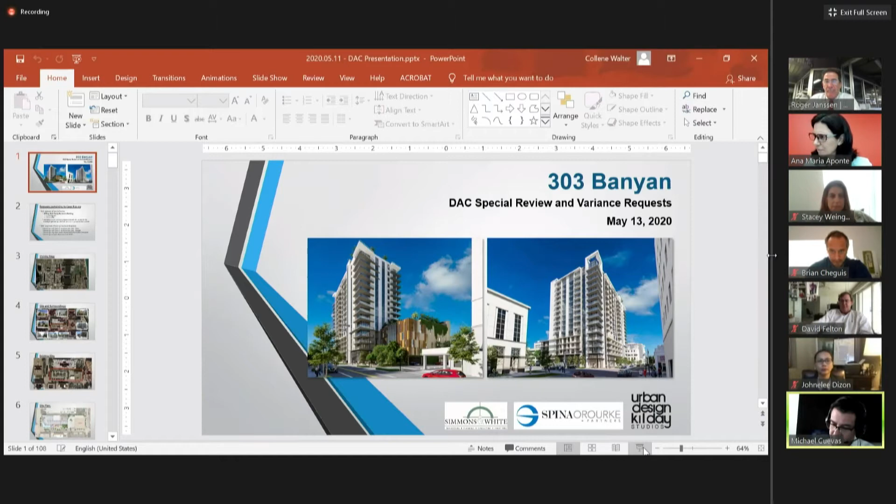Rob, you are on. Good morning, everybody. Let me just get my screen shared here. All right, just as a technical clarification, does everybody hear me all right? Yes. And is everybody seeing the PowerPoint presentation on the screen? Yes. Great, good morning.

My name is Rob Dinsmore with Urban Design Kilday Studios. We are the agent for the 303 Banyan development project. I'm joined today by the applicant, Todd Jacobus with Woodfield Development Company, as well as other members of our design team, Keith Spina and Tammy O'Rourke with the Spina O'Rourke Group, the architects. Collene Walter, also with Urban Design Kilday Studios, is here with me in the office. We have Greg Bolin, Brian Kelly, and Eric Cooper with Simmons and White, who are the civil and traffic engineers on this project, and Brian Donahue with Insight Studios, who are the landscape architects on the project.

We are before you this morning in regards to case 20-03 on your agenda. It's a multi-part request, and we are seeking DAC approval of special review for a 15-story multifamily residential building, consisting of 233 dwelling units and 3,185 square feet of first floor retail. Also, as part of that special review request, we are seeking approval for the utilization of TDRs previously approved for this site to increase our building height and FAR under the Quadrille Garden District Special Incentive District. We also have a request for approval of 4 variances, which we will go over in more detail during the presentation.

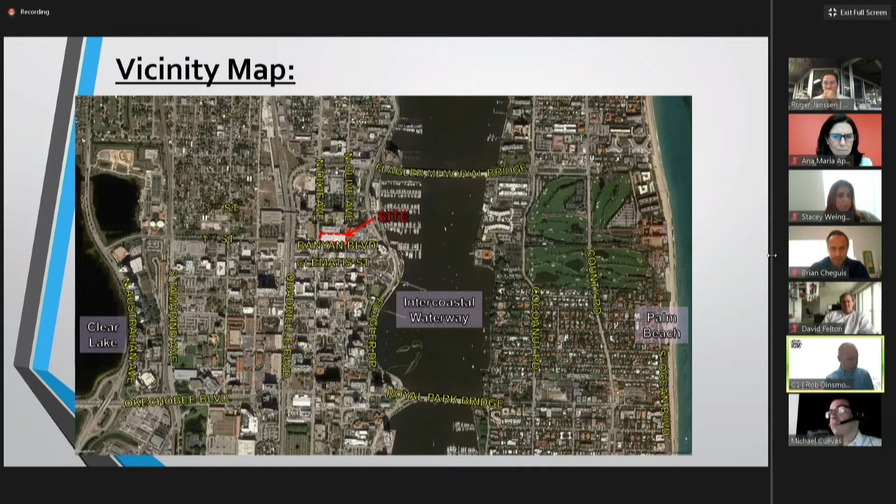Project site is located on the north side of Banyan Boulevard between Dixie Highway and Olive Avenue. Banyan Boulevard itself is one of the city's main transportation corridors, east and west within the city, connecting downtown and

the Flagler waterfront. The surrounding uses to our site on the west and north side are mostly governmental: City West Palm Beach City Hall, Palm Beach County Courthouse, and the Palm Beach County Government Center. On the south side, we are surrounded by retail and commercial uses.

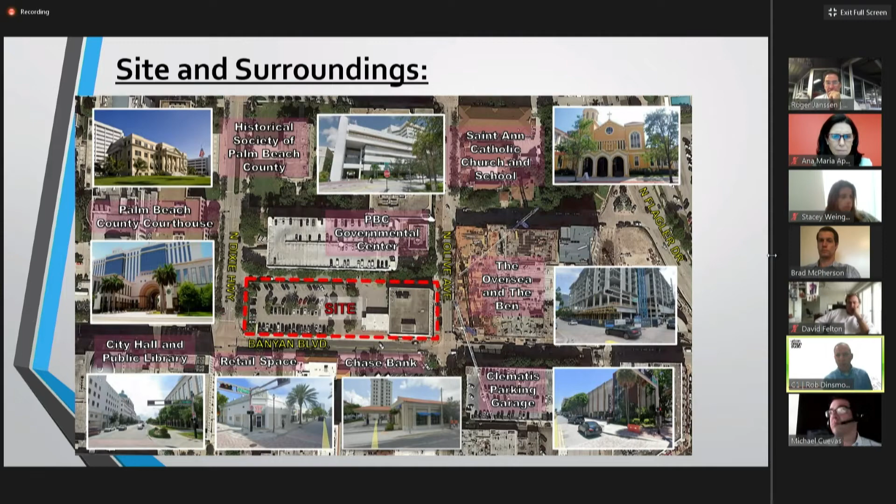And directly to the east, as part of this connection to the Flagler waterfront, is the former City Hall site, the redevelopment of the Ben, and the Oversea multifamily building, which happens to also be a Woodfield development project, who is the applicant for this particular project as well.

The site itself is 1.66 acres along Banyan Boulevard. It currently supports a 4-story, approximately 44,000 square foot office building with 5 drive-through lanes for a financial tenant, Wells Fargo, and a surface parking lot.

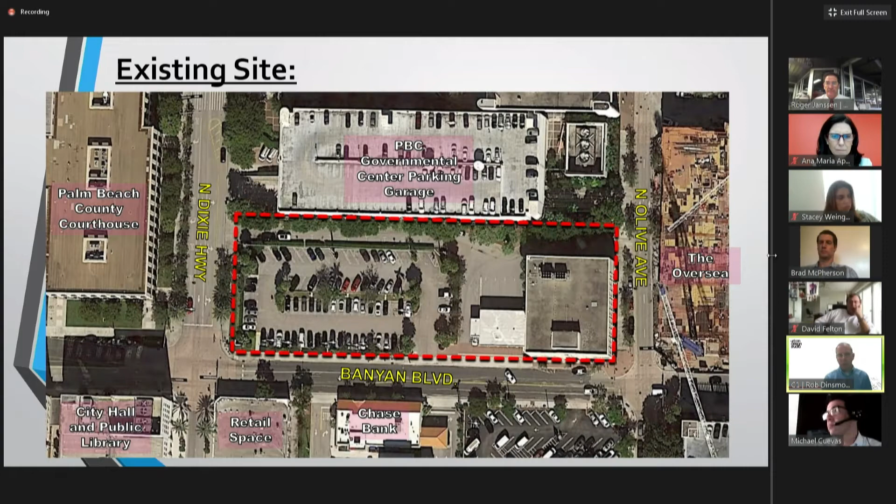The proposed plan of development includes maintaining that existing 4-story office building, as well as 3 of the 5 drive-through lanes. We have the 15-story multifamily building on the western portion of the site with an internal parking structure and almost 3,200 square feet of first floor retail designated within the light blue.

It also includes some surface parking and a 2,332 square foot garden courtyard at the southeast corner of the multifamily building itself, central to our Banyan block.

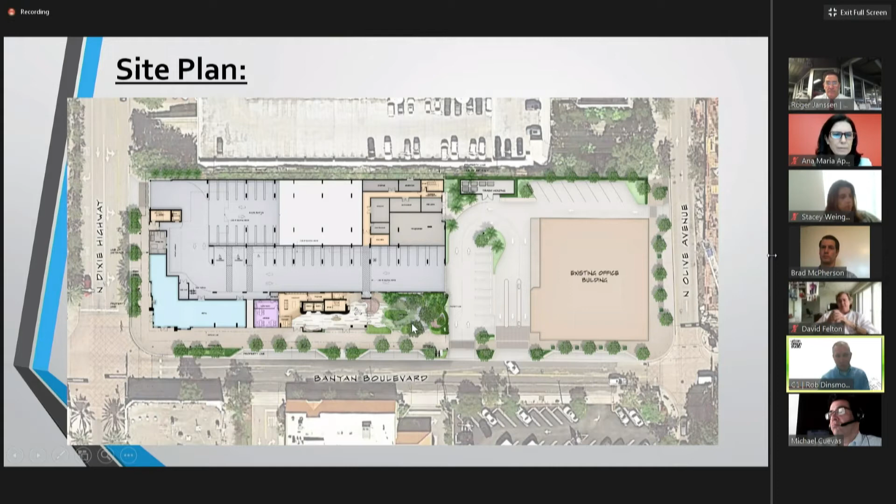So any project site within the downtown master plan with a site area greater than 50,000 square feet, or requesting the utilization of TDRs, requires DAC special review.

Just to refresh everybody's memory for anybody in attendance or listening, the DAC special review standards include the relationship of the building to the site and surroundings, circulation and traffic flow review, analysis of the building design itself, and review of public realm improvements.

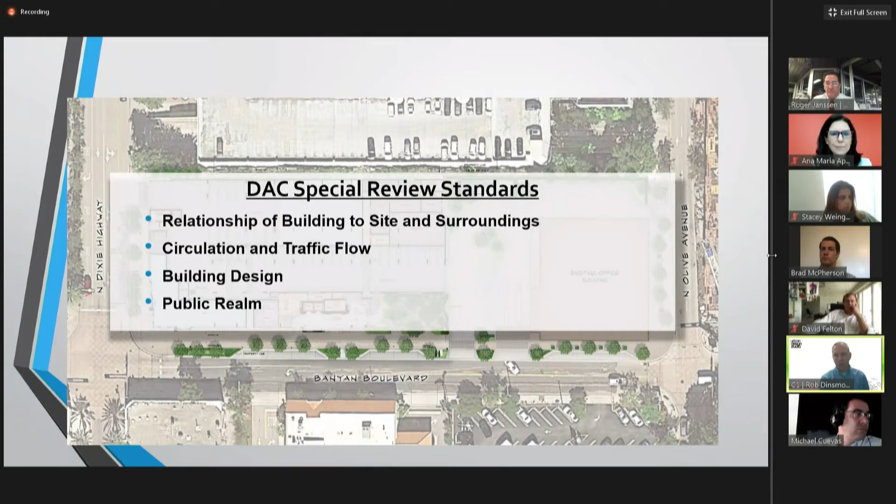We might not hit on all of these items in this exact order, but it is our goal to touch on all of these to make sure this committee can make an informed approval of this project.

So we'll start by looking at the existing circulation of the site. Our site currently has 4 curb cuts or driveway entrances for ingress egress, 2 of which are along Banyan Boulevard, which almost create a continuous 80-foot curb cut.

Approximately 50 feet of which are to provide the functional use of the 5 drive-through lanes that exist today. The downtown master plan code allows for a maximum curb cut of 25 feet.

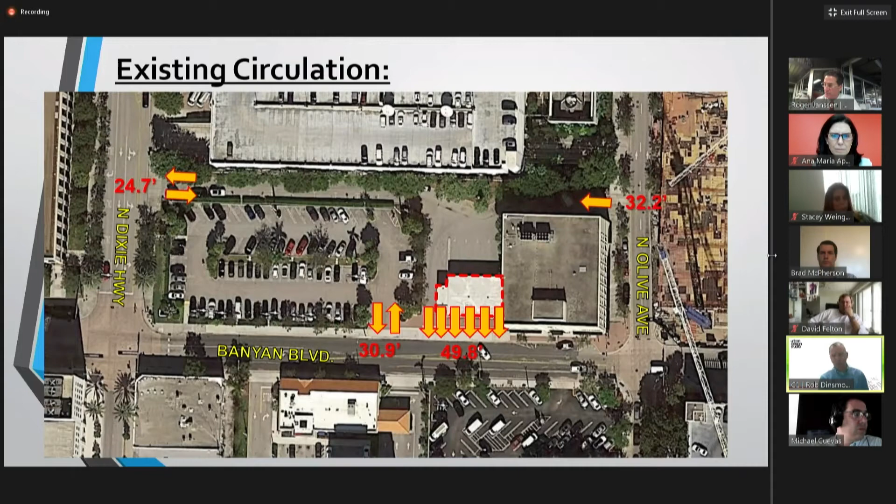The existing condition, as it stands today with all of these curb cuts, really does create a potentially hazardous situation for pedestrians. This is something that we would like to improve on.

So with the proposed plan of development, multiple improvements have been made in regards to circulation and access to the site. One of our goals as we worked through the design process, and trying to make sure the site would function well with our proposed use and the existing use, was to maintain the curb cuts in their current location as much as was appropriate, to allow for that traffic familiarity to be maintained for the site itself.

This also included a reduction in the width at every curb cut location. None of the curb cuts remain as wide as they were before. We did improve on all of those.

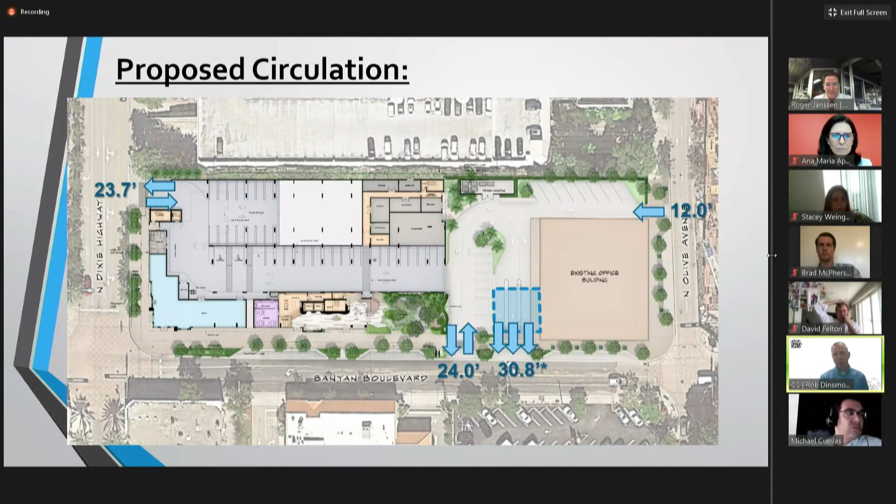The applicant has worked very closely with the current owner of the site and the existing office building, and with Wells Fargo, the main tenant within that building, to come to an agreement to reduce the drive-through lanes from 5 to 3. This allowed us to make a reduction at that particular curb cut alone of almost 20 feet, so it really did improve that situation a lot.

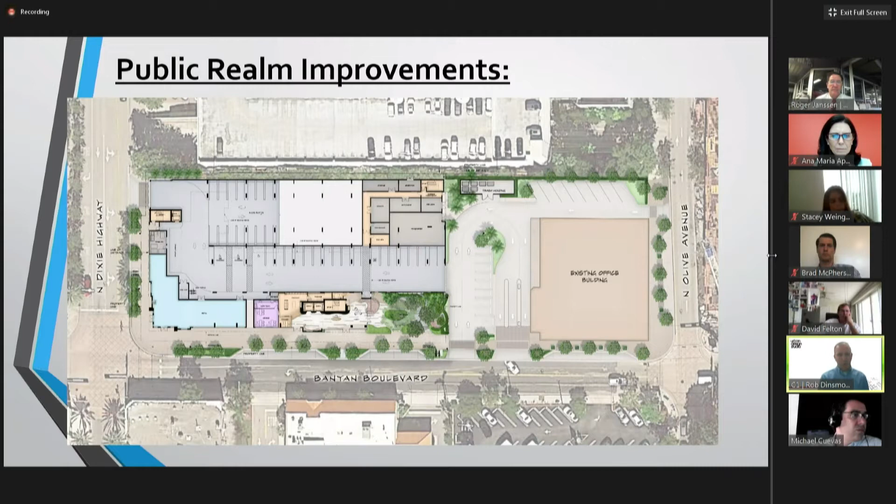In addition to the improvements for the curb cuts, which improve public safety, the proposed project also provides several public realm benefits. First being a public open space, a

2,323 square foot garden courtyard, central to our development block, with planter wall seating, public art, and convenient public access to the residential lobby as well as the parking structure.

We are also proposing multiple streetscape improvements along all of our frontages of this project site: Dixie Highway, Banyan Boulevard, and Olive. Those improvements will include new street trees and landscaping, as well as providing the required structural soil improvements under the sidewalk to support those trees.

Decorative paver crosswalks at every driveway for an added safety measure. Additional on-street parking along Banyan Boulevard, bike racks, and an enhanced bus stop, which includes ADA accessibility and shaded seating under the proposed landscaping along the streetscape.

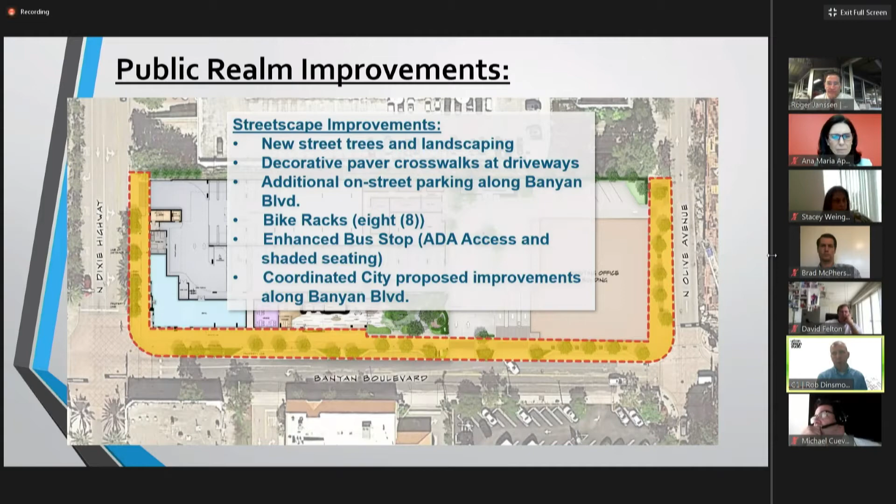And we have worked in coordination with the city to make sure that our proposed improvements along Banyan Boulevard are coordinated appropriately with the city's proposed improvements to that street.

As a TDR receiving site within the downtown master plan, we are eligible to take advantage of the special district incentives that will allow for an increase in our FAR and building height. We are asking DAC to approve that utilization of those TDRs for TDRs that DAC has previously approved to be transferred to our site. This will allow us to increase the height of our building from 10 to 15 stories and the FAR from 2.75 to 3.75, resulting in a proposed total square footage for the entire project site of 271,387 square feet, roughly 44 of which will be the existing office building remaining on site.

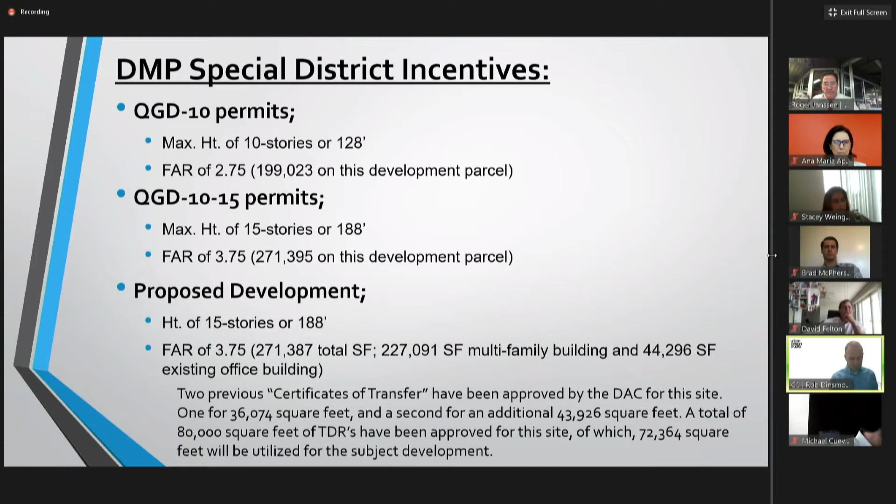We began this design process at the end of last June with a pre-application meeting with the city, and made our initial submittal at the beginning of September. From that point, literally up until yesterday, we have been working closely in coordination with the city in review of this project and the design, with the main effort being to eliminate or reduce any possible variance requests as much as possible.

This has probably been more taxing on Keith and the architecture group than anyone, because they really had to conceptually redesign the first floor of this building four or five different times, trying to work through possible solutions, finally landing on one, or coming back to different design layouts to make sure we're going to have a successful project.

What we came to realize is that there were certain constraints that were going to be very hard to overcome. We were trying to deal with the existing functionality of the site as it stands today, especially since we are maintaining that office building in its current location. Even though we are reducing the drive-through lanes from 5 to 3, it still has to function, so that is a constraint item on the design of this project.

We are dealing with the actual physical constraints of the site itself. It is a very narrow site, north to south. So when designing a building that has to function, and especially creating a parking structure that needs to function, there are minimum design dimensions that have to be accounted for.

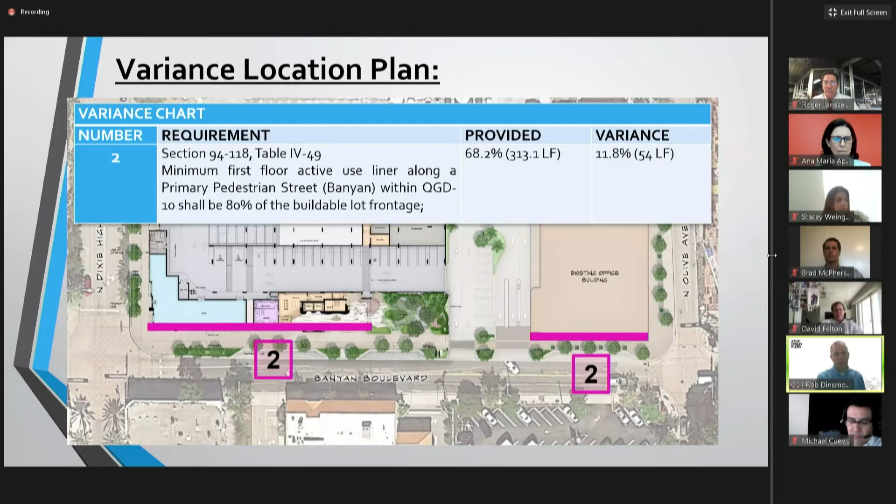The second variance is for the active use liner space along Banyan Boulevard. Again, we really have maximized this as much as possible. One of the biggest hurdles we ran into was the drive-through lanes, which require a good portion of frontage along Banyan to allow those items to function properly. So removing that linear footage, as well as our traffic circulation needs for the building, we really did lose some active use liner space there, but we maximized it with all the other items we are providing.

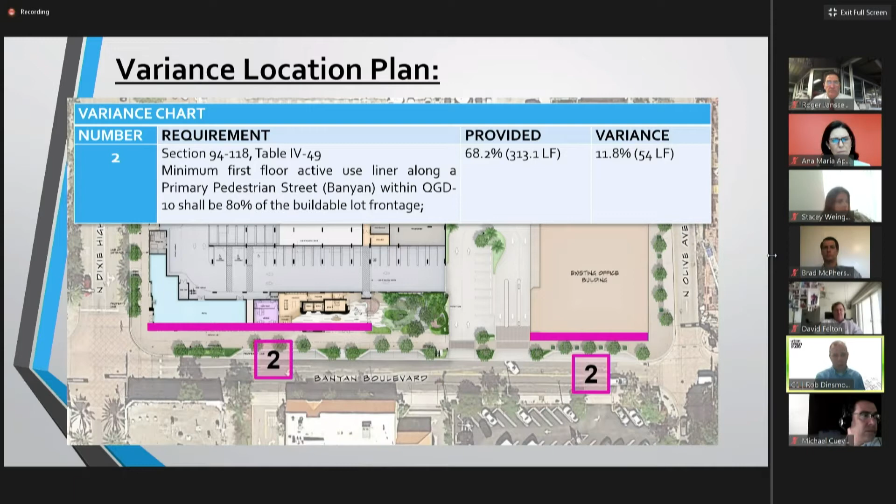The third variance is for the active use abutment to our public open space. We would have liked to add some active use liner space along the north side of this public courtyard. However, with the physical restrictions of the site itself being so narrow north to south, we had to provide minimum dimensions for the parking structure to function, and so we were limited in that regard.

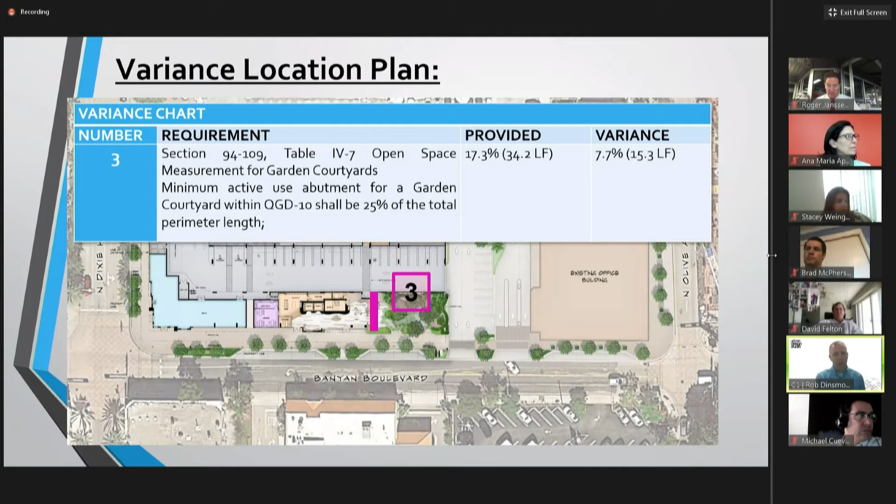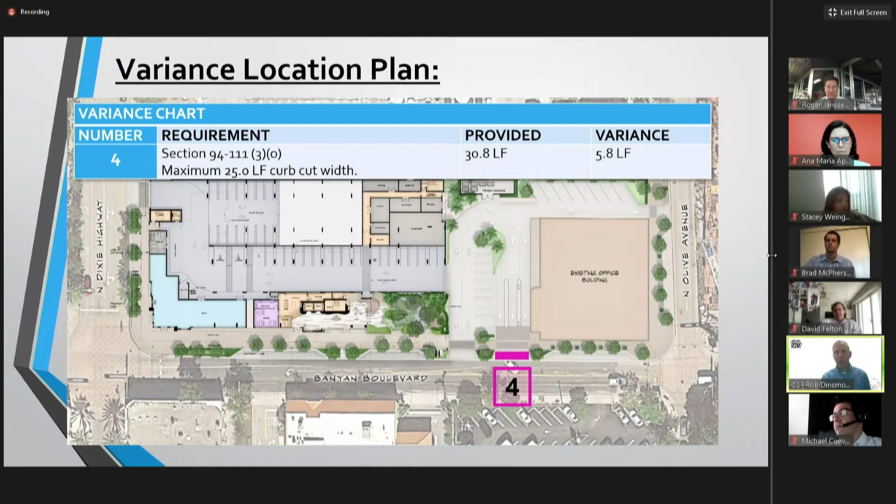The final variance comes back to the drive-through lanes and the driveway width. The downtown master plan allows for a 25-foot driveway width, and we could only reduce ours down to 30.8 feet, which is a big improvement on the current 50-foot curb cut in that area. But with the existing drive-through lanes in their location, the point of service was so far south that we could not reduce that curb cut any further to allow vehicular movements to safely function in that area. That's the reason for this variance request.

So, like I mentioned, we really did go through a pretty thorough design process in close coordination with the city and all of their departments.

And we feel that we have landed on the minimum variance requests as required for this project. And staff does support all of our variance requests.

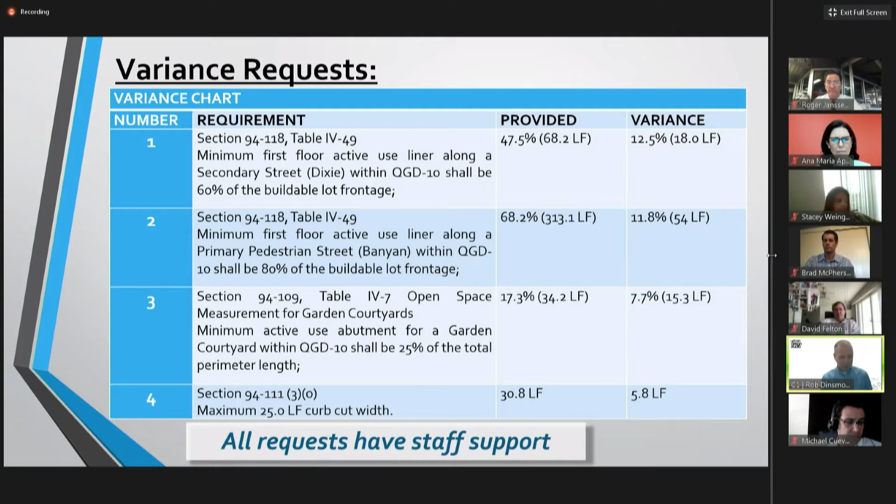And so at this time, I will pass the presentation over to Keith Spina to discuss the architecture and the building's relationship with the site and surroundings.

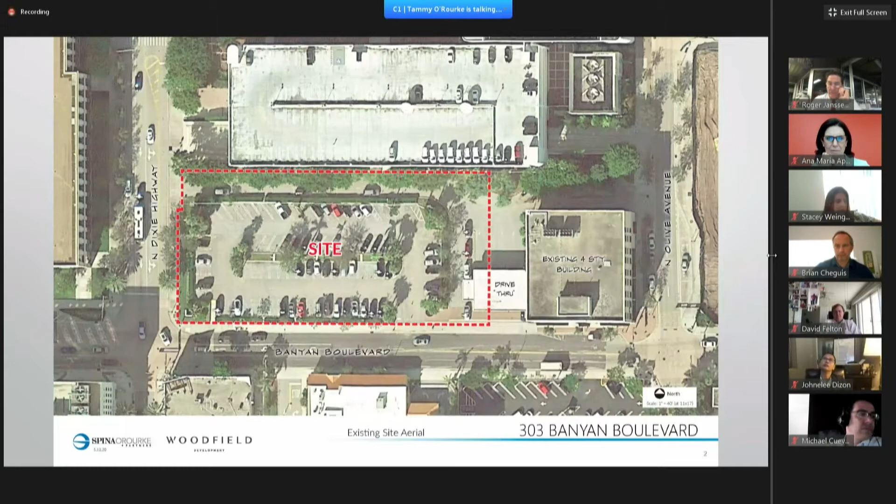Next slide, Rob. And one of the things we wanted to do as we started to design this project is really understand the surrounding properties. I think it's also part of what DAC looks at.

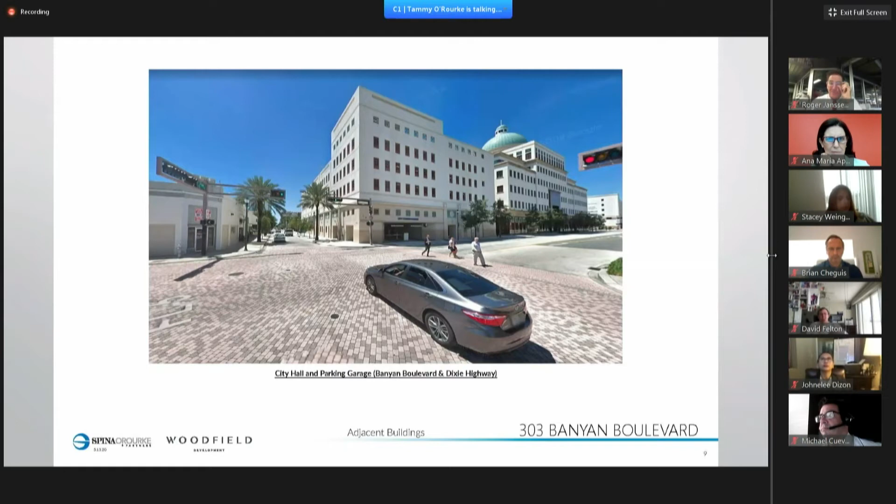So what I wanted to do now is just walk you through the building plans.

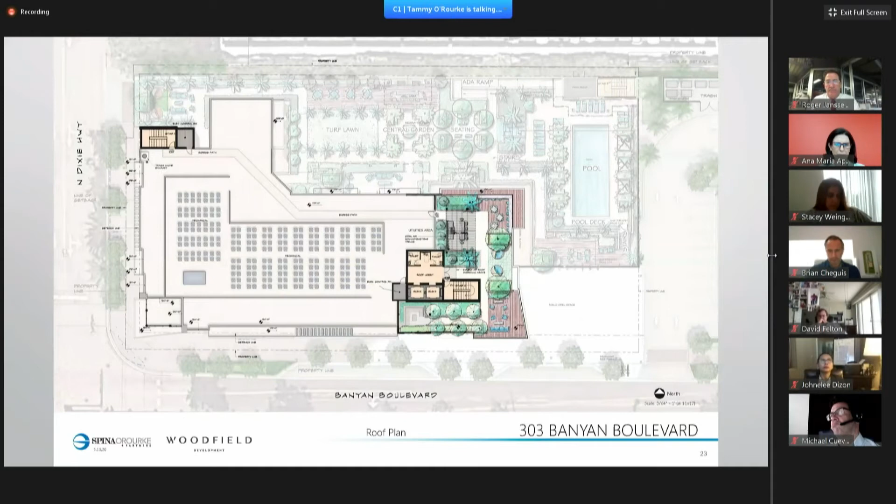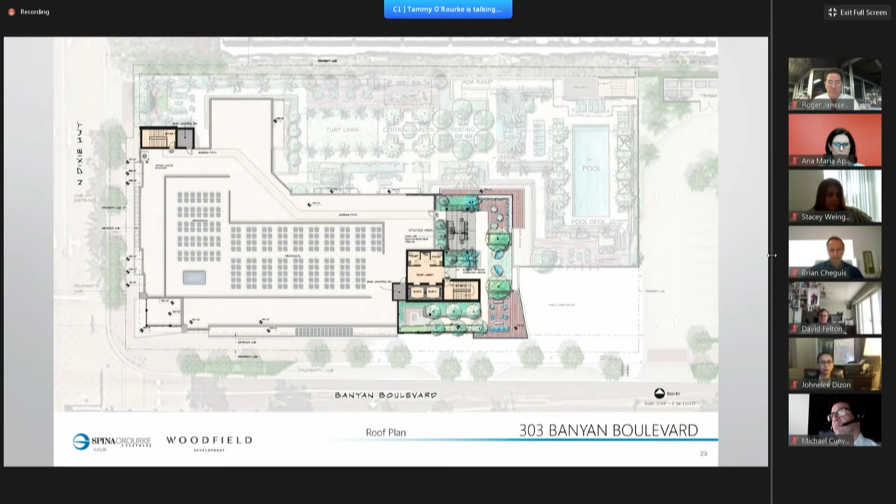At the top of the building we have an incredible rooftop terrace that is east-facing, with dramatic views of both the Intracoastal and the Atlantic Ocean. We did a rooftop terrace on the Oversea project that's just about finished, and we can't wait to use it. But after finishing the Oversea, we realized that although it had a beautiful west-facing view, we really wanted to locate this terrace on the east end to get dramatic views for the residents.

Now we'll talk a little bit more about the exterior.

Again, in keeping with trying to figure out what's existing in the market, this slide shows some existing buildings, partially existing is One West Palm on the top right, and we have the Oversea, the Ben, and the Alexander Tower, which are all existing projects. On the left is Broadstone in the middle, and then a couple of projects that, although not built yet, were previously approved. We studied the architecture and worked closely with city staff on things like how to screen liners and how to treat big walls on buildings. We thought this was really helpful. So these were some existing and proposed projects in the city.

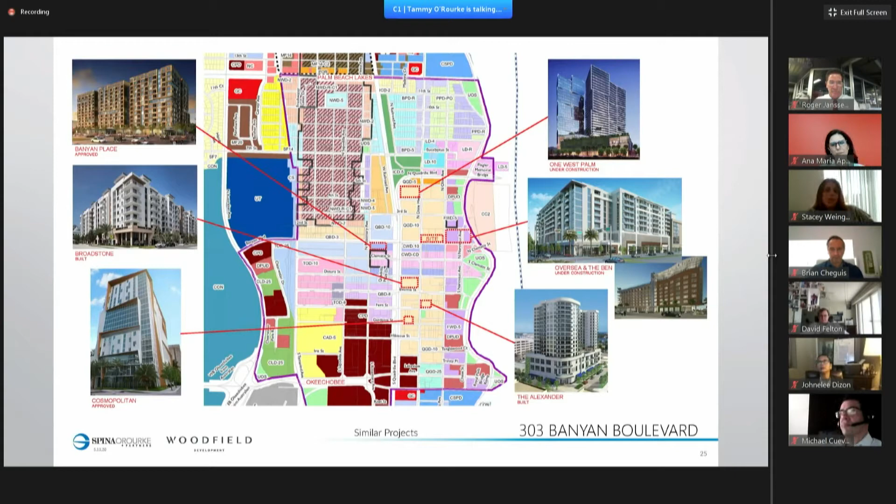Then in more detail, we started to really study existing buildings that were very similar in product type, meaning most of these are residential, multi-story, in most cases high-rise buildings. We looked at different ways, some older, such as the Strand, and some of the newest, in this case the Oversea.

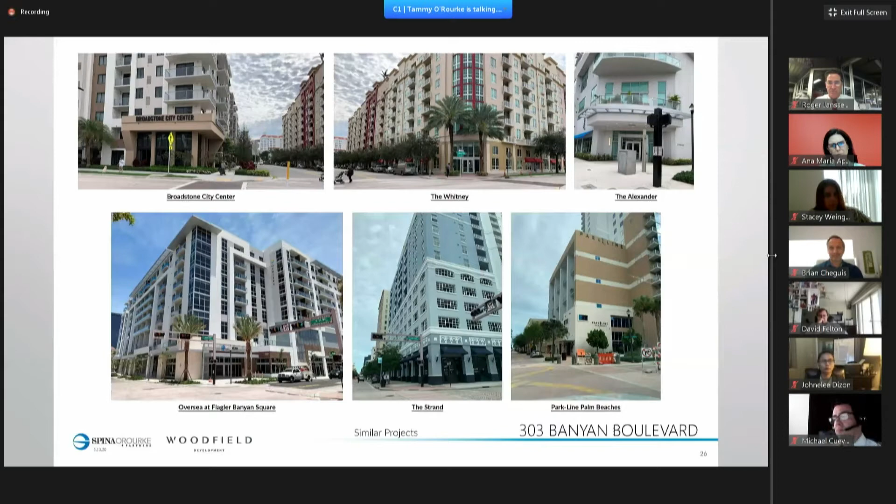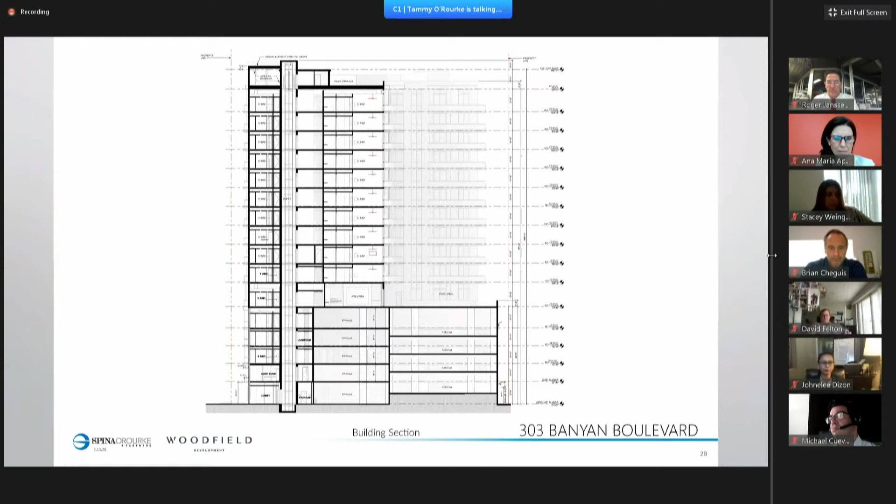The building code thinks it's 16 stories because we have a mezzanine level on the first floor. The first floor is 20 feet floor to floor, but the building department counts it as 2 floors - it's really 1 floor according to the zoning code. That's something you'll see throughout downtown. It allows you to get an extra level of parking on the 4th floor, so you get 5 levels of parking in 4 floors of building. Then once you get above the parking level, it's apartments on a double-loaded corridor.

Now we're going to show quickly, and then get into some 3-dimensional sketches that talk a little better and show the architecture. One of the things we wanted to do is we were kind of critical of some of the buildings downtown, including ones we had designed. We wanted to design a building where the architecture in most cases could stand on its own and did not need a bunch of fluffy architecture or treatment onto the facade. We feel we have a strong base, a middle field, and an interesting top to the building. The building does have a sense of verticality to it, and we feel we've really mixed a combination of base building materials that help break up the massing of the building. So I'll go quickly through some 2-dimensional elevations of the 4 sides, and then we'll get into some 3-dimensional studies.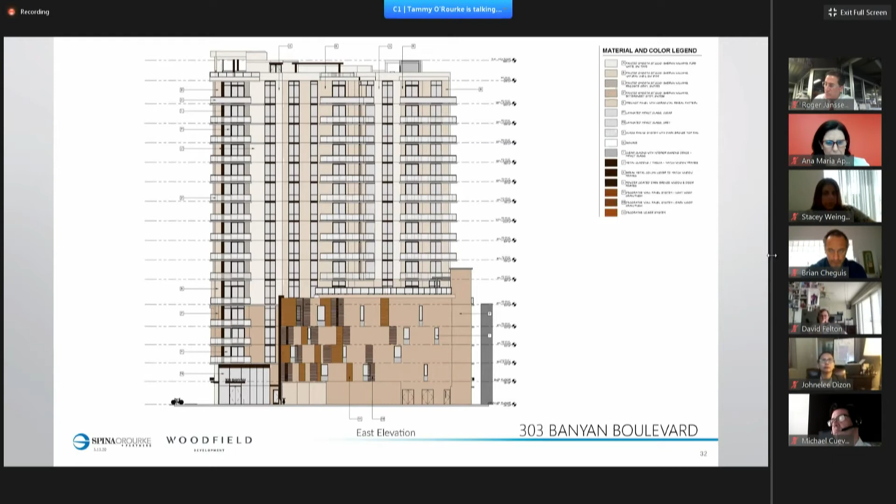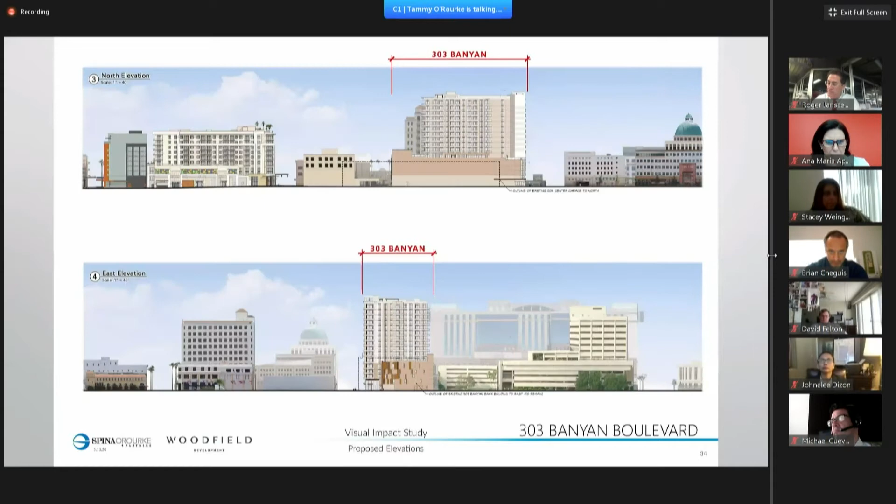A couple more views showing the same thing. Again, you see the north view with the big garage, but you see the dotted line that shows the county garage that screens the majority of that building.

The next thing, relative to when we were studying the design, it also helped us work with the city staff to understand how the building would be seen from the community. One of the things we worked a lot on was our blank walls and breaking up the building. So we did a series of studies, mostly heading south down Dixie Highway, because it's a really prominent view, and we thought it was a great way to study the building. This was also one of our most challenging corners of the building, the northwest corner.

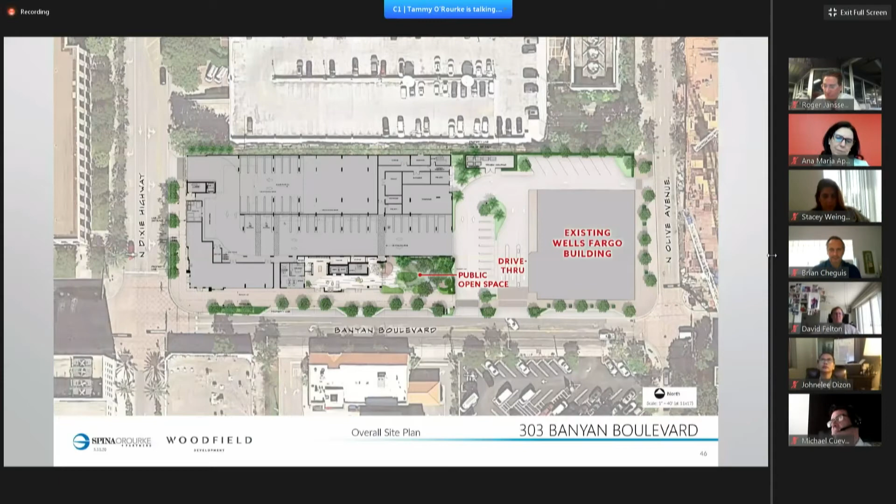So we're going to go back and talk a little bit about our public open space. As I described earlier, the eastern side of our site we feel is the softer, gentler residential, especially with the Oversea being right across the street. So we focused on providing the public open space at that eastern end of the building. Next slide.

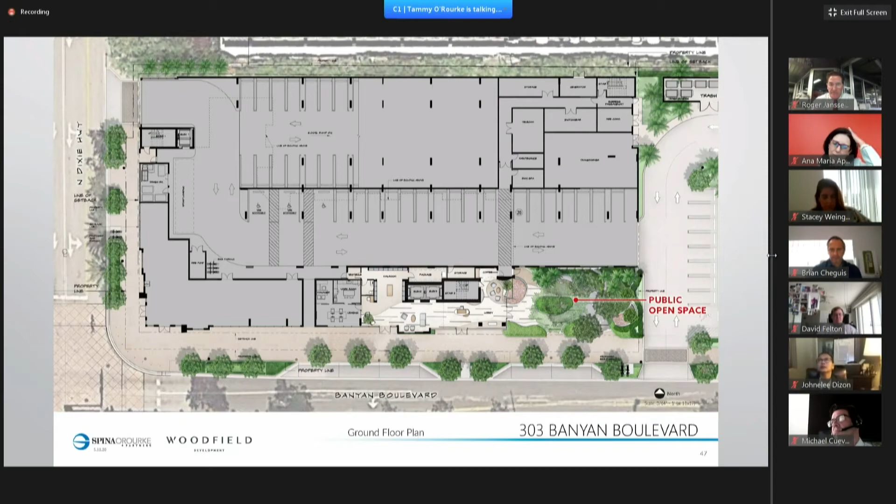Another thing that we did is, although there was a specific square footage of public open space that I think we've met, we wanted to figure out how we could give the appearance of more public open space to not only the residents, but also the public. Go to the next slide.

So the next slide, what you find here is our public open space — can anybody see my mouse on the screen? No? So Rob, if you can just show where our lobby doors are. Right there where Rob's cursor is, so our public open space is to the right of that, the east, but we've treated the corner of the public lobby of the building as a very transparent corner.

We've also taken the materials, both hardscape and vertical treatment of materials, and even in some small token of the landscape, and pulled it right into the building lobby. So we think that as a resident, your public open space will be the outdoor area, but also the indoor area. As a visitor, you'd get the same experience. As a non-visitor, but public walking by, we hope that with the activity going on in the ground floor lobby and the public open space that is open to everyone, you'll see the same experience.

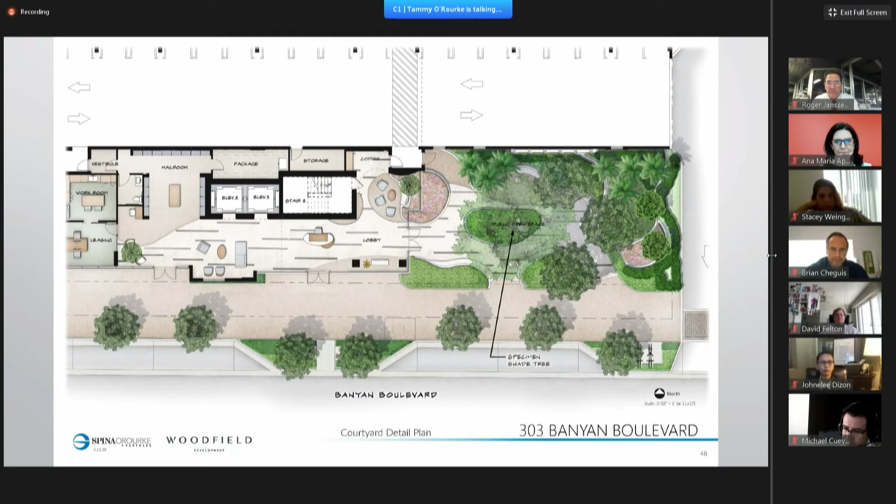It was something that we worked really hard on, and we think that, hopefully the staff agreed, it was a little bit unique way to exaggerate the public open space, but we feel it's effective. Next slide.

And then we started to work very closely with another part of the building that we were challenged with, which was the treatment of a portion of our garage, since there was just no other way to get the project to work without having this happen. But how do we hide a portion of the garage, not with the traditional liner of putting apartments in front of it, but something more creative?

So one of the first things we did is we started talking about art in public places. We thought it would be really interesting, kind of like they did a little bit with Alexander Tower — I think Broadstone also did a great job of it. But instead of just taking a sculpture and putting it on a pedestal in the front lawn, which is one way of treating it, we thought that we could take the building itself and try to work with art in public places as if the artists were trying to design the facade of the building.

So what you see here is we actually reached out to a couple of what we'll call emerging, but also local artists. These are two different concepts that these artists came up with that treated the corner of our building in a way that was fully integrating art in public places into the building itself.

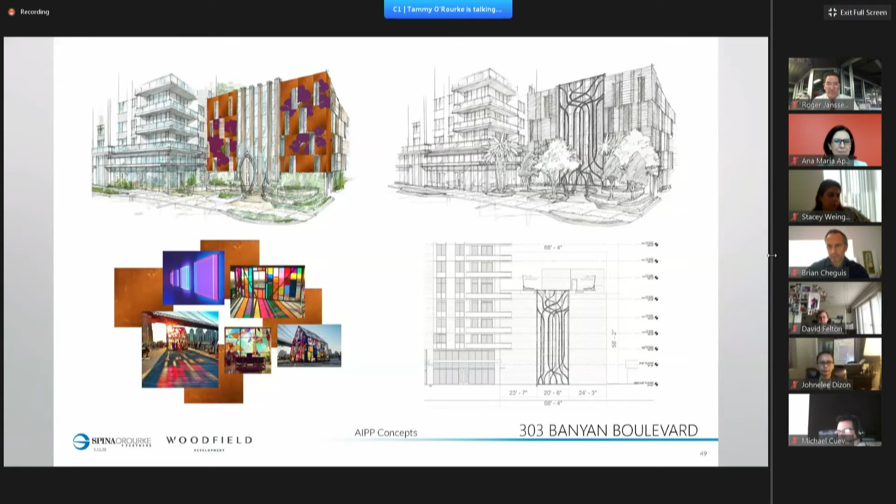So now again, the lower building on the right-hand side is our garage. You can see the inspiration where we've treated the center portion with a spandrel curtain wall. We've treated the sides using the building openings, since it's a garage with some openings, but also applied interesting creative materials to the facade to create unique interest. The treatment of the hardscape and landscape at the pedestrian level is also critical to the success of this whole facade.

We've been working closely with Brian Donahue, our landscape architect, and we think we've come up with a great public open space that also adds to buffering our liner. Next slide.

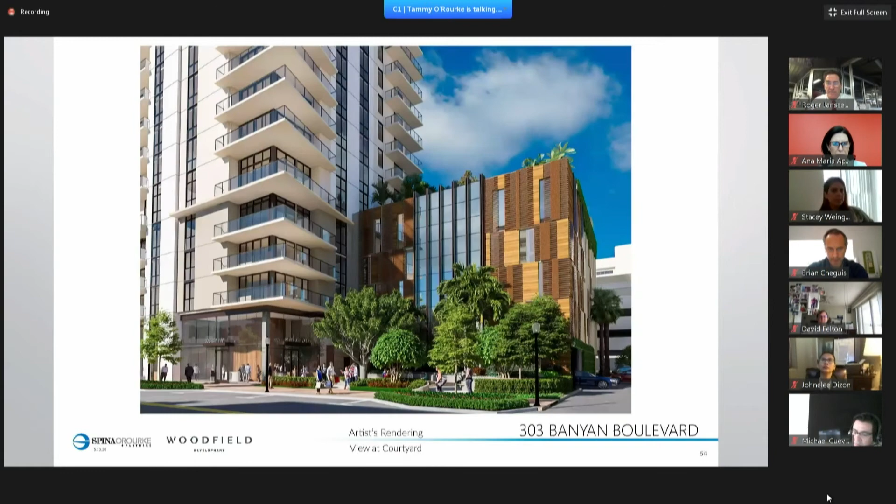So next slide, go back to this. One more, please, Rob. I guess we wanted to really share this series of drawings that staff had asked us to do, which got into great detail of how we're actually going to build the construction of the garage to create this liner effect. So what we have is a series of layers of this building that show how we build it.

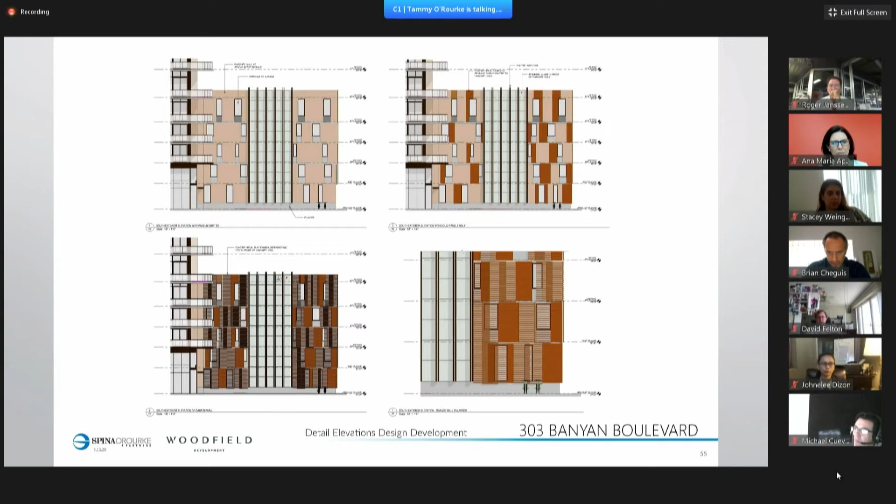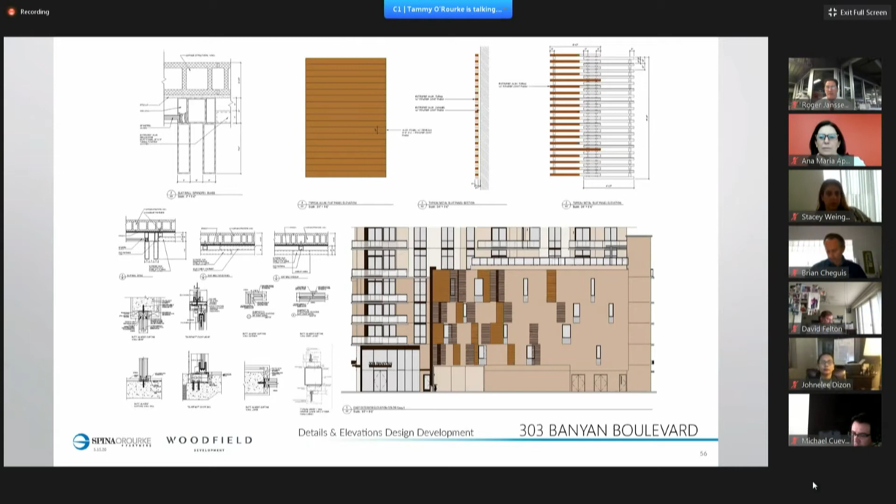So, please don't ask me a whole lot of questions because this is really complicated, but we even went as far as understanding the construction methods of how we would literally build this stuff. We do have physical samples of these materials and will show you some pictures briefly. We also have them in my office next to me, and if someone wanted to see a piece, we're happy to hold it up in front of the screen.

Next slide. So now what we've done, like we've done a couple times, is show this building out of conventional construction materials, with a zoom in of certain areas labeled with the materials. In your packet you can see each of these materials specifically. We'll go through a couple slides that touch on them.

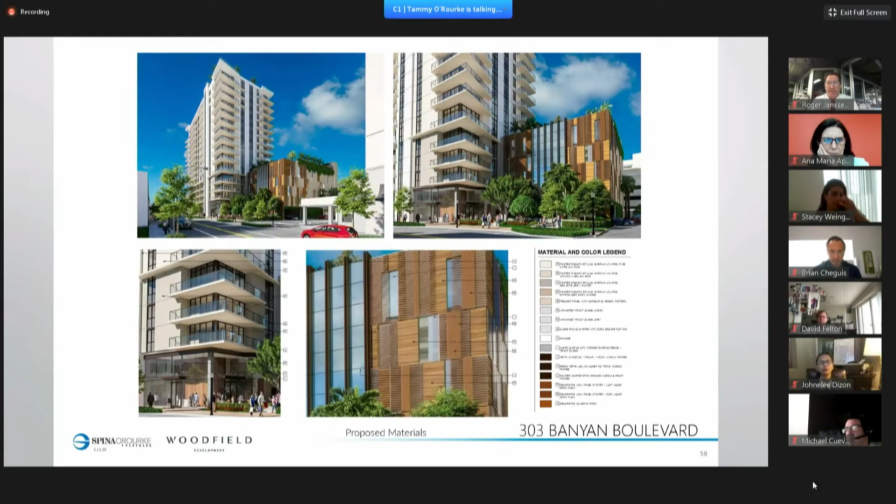This is another portion of the building. One of the things we did at the ground floor is include a very contemporary cast stone wall material that we think looks great, but also gives a real elegant feel to the base of the building at the pedestrian level where everybody experiences it.

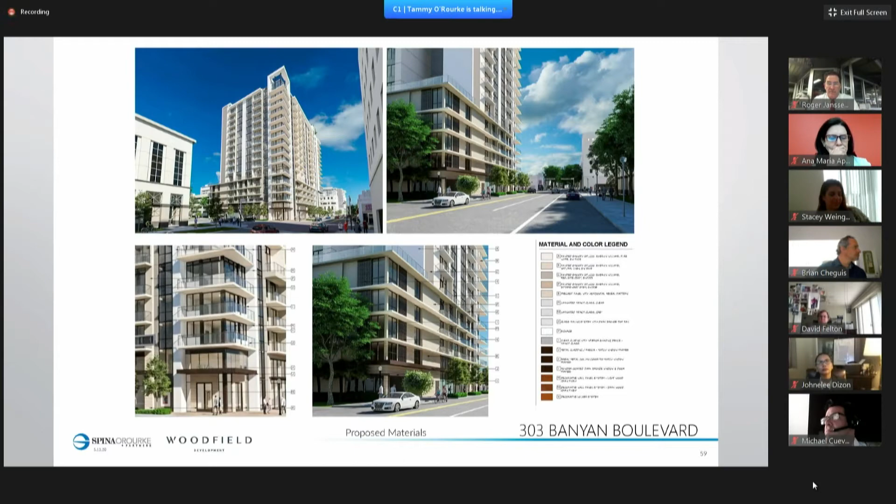There's a bunch of the materials - these are some of the paint colors, and the cast stone, a picture of one of the materials we've worked closely with our construction team to figure out how to pull off, a fairly contemporary, elegant cast stone material that will be part of the cladding of the first floor level. We also have porcelain tiles around the building on the ground plane that were pulled into the building lobby.

Glass was one of the things that was really important in our building lobby, which plays into the public open space. We wanted a very transparent treatment of the glass at the ground floor, so we have some great details that will blur the vision between the inside and outside of the building and the public space in the lobby. We have clear glass, and then tinted glass as we look higher up the apartment building.

This is a physical sample of one of the panels we had fabricated to make sure of two things: one, that we could build it and fasten it to a building, and two, that we could afford to do that. The material won't be silver, it'll actually have a wood grain. We had inspiration from our artists, and from other architecture we studied, that we thought would give a real warm feeling to the facade.

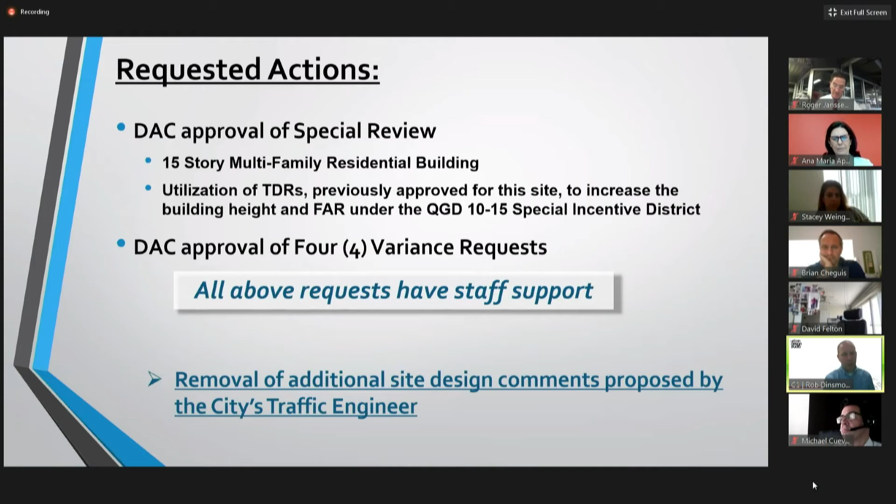I'm going to clarify a couple of things. You'll see a note at the bottom of the screen. As I mentioned, we've been working with staff pretty closely since September up until yesterday to clarify and resolve a couple items. These traffic-related items, I'm brushing through because we did resolve them sufficiently. We believe we're working through that and will have those resolved with our follow-up PPRC resubmittal.

One other item clarified with staff is condition 1D within your packet under the special review: the surface parking lot should be adjusted to maintain the minimum setback area. This has been clarified with staff, our current design does meet those standards, so this condition is going to be removed, and Ana Maria may touch on this in her presentation. All other conditions associated with the requests for this case are acceptable to the applicant. Thank you for your time, we'd be happy to answer any questions, and we'll turn this over to Ana Maria.

Thank you, Robert and Keith. Very thorough presentation. I will start sharing my screen now and do the staff presentation. Can you all see my screen? Good, okay. So as we say, I'm gonna go... it doesn't.

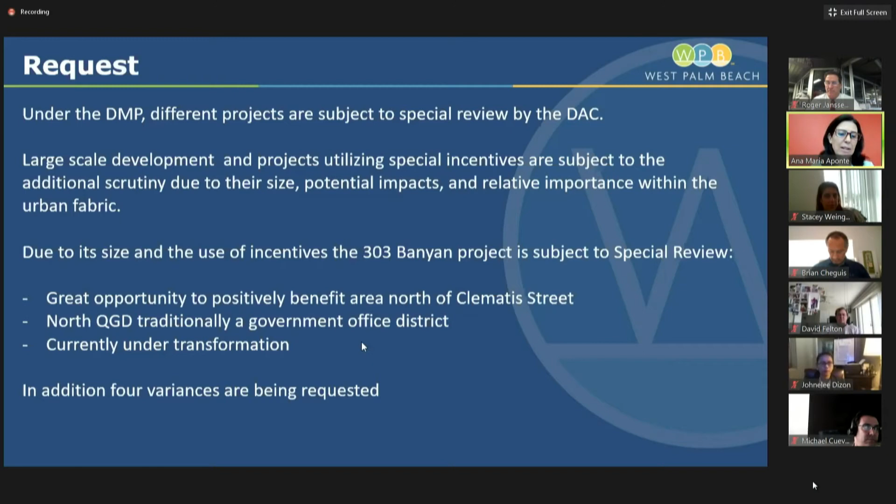It's an important transformation, and the details on this project, we have been working very hard with the applicant to really engage and make the best that we can with this project, acknowledging all the constraints that we have for this site. In addition, the applicant is requesting variances, as Rob mentioned, and staff will analyze those. As the variances are going to be impacting the compliance for the special review standards, staff will analyze the variance requests first and then go through the special reviews.

The 4 variances, as already mentioned by Robert, so I'm not going to go over them, but in essence, all the variances are related to the construction of the public realm. They are all affecting how we construct our public realm and what is going to be the ground floor environment for pedestrians.

It's very important to mention that the quality of the public realm is fundamental for a vibrant downtown environment. The public realm is not only built by the streetscape, so the streets and the landscape, but it's also built by the activities created by the private buildings along the street. We have made great progress in the city since the master plan was created to build on the history of downtown, but also to make every project improve conditions.

You can see on the left side of the screen some of the cases where we have no active uses facing the street, and the impact that generates on the environment for pedestrians. To the contrary, you can see on the right side when we are able to work with projects that provide activity along the street, how they engage the street, and the different perspective and environment that is created. It's a big difference.

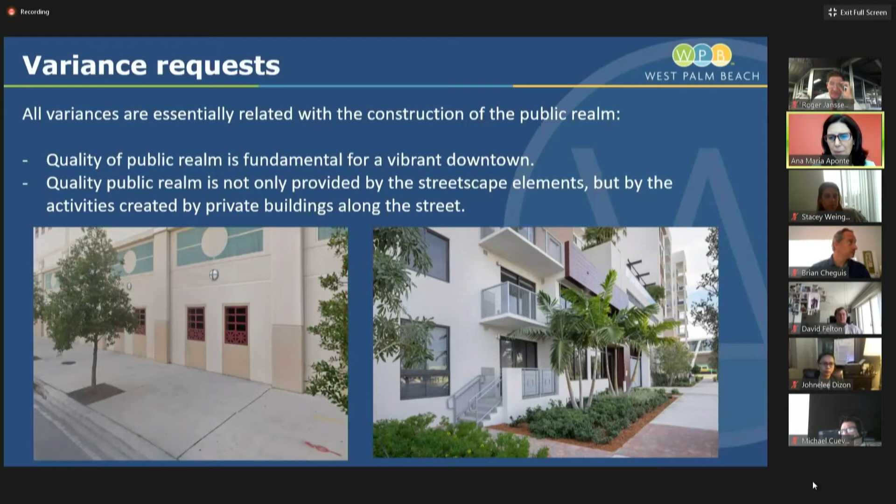That's why staff works with applicants so hard to make projects as close to full compliance as possible, but when we have constraints that will not allow full compliance with the active use requirement, we work with the applicant to make every improvement possible to reduce the variance as much as possible. The applicant can give faith of that. Staff has been working with them, and we have done everything possible to make the best we can with this project under the circumstances and constraints.

Part of what the master plan does is provide specific regulations that ensure the quality of the public realm. Section 94.109 specifically states what an active use ground floor means: it's an active use that attracts pedestrians, provides direct access to the general public from the sidewalk or public open space, and conceals uses designed for parking and other non-active uses if present. Ground floor active uses generally include, but are not limited to, retail, other commercial, office, restaurants, coffee shops, libraries, institutional, educational, cultural facilities, residential, and entrance lobbies.

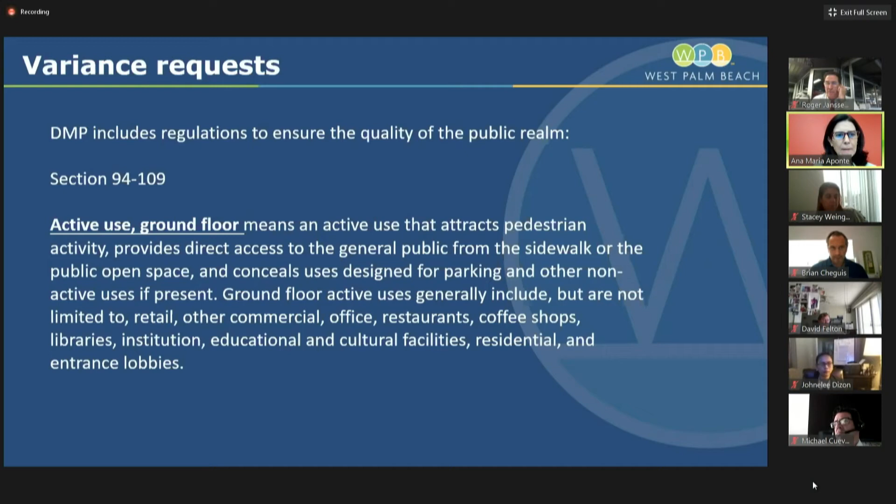With this in mind, staff analyzed 3 of the variances specifically related to active use requirements: the active use requirement along Dixie Highway, the one along Banyan Boulevard, and the active use requirement around the perimeter of the public open space. So the first one is regarding Dixie Highway.

As Rob mentioned, Dixie Highway is considered by the Downtown Master Plan as a primary street. A primary street is the highest classification in terms of the quality of public realm that we want, so it's the street we want to give the most priority. In this case, Dixie Highway and Banyan Boulevard are both primary streets.

In the case of Dixie Highway, the building frontage for this project is 143 feet, which is a very narrow site. When you think a parking structure with a double loaded corridor, 2 aisles, is 120 feet, by the time you add the active uses, it's really constrained. So in this project, they are already building somewhat inefficient parking when you have 2 aisles but only 3 parking rows. They've already given up one of those parking rows to accommodate the liner uses that are required.

In particular, for the case of Dixie Highway, the active use required is 60%. The lot frontage along Dixie is less than 250 feet, so the requirement is only 60% of the frontage.

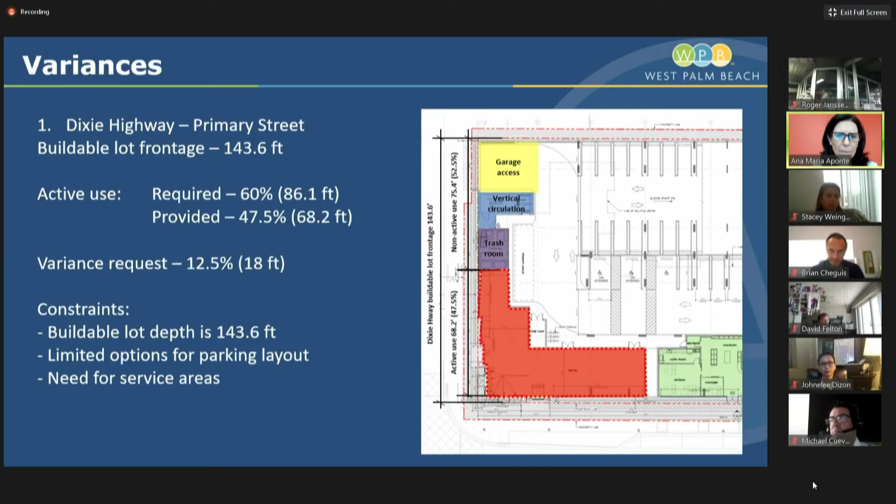The applicant also worked with staff to provide some treatment for the non-active uses. The area dedicated to the garbage is going to provide glazing with interior shading devices. So in terms of the pedestrian environment, the pedestrian will perceive the retail facade with the glazing, the storefront continuing to cover the entire area, and they probably will not notice what is in there.

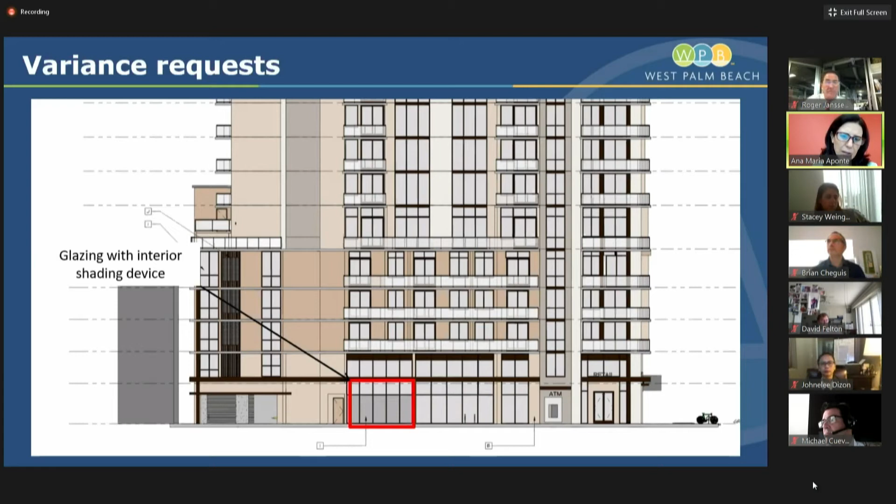That has also helped reduce the negative impact on the pedestrian environment from the non-active uses provided. Regarding Banyan Boulevard, the justifications are very similar. The constraints of the site, the depth of the site, are also affecting the provision of active uses along Banyan Boulevard. The active use requirement along Banyan Boulevard is 80%, as the frontage is larger than 250 feet, so the applicant is required to provide 367 feet of frontage with active uses. The project is providing 68%.

That includes the commercial uses towards the west of the site, the residential lobby with the leasing office, and the existing commercial use where Wells Fargo is located towards the east of the site. That is a total of 68%, 313 feet of frontage provided with active use.

However, as Rob also explained, there are a couple of features that exist right now, like the bank drive-through, which the applicant is reducing but still has to remain in the current location due to contractual agreements with the existing tenant. Then there's the entrance to the parking garage and the small surface parking lot provided from Banyan Boulevard. That accounts for basically 17% of the frontage accommodated as a vehicular use area.

In addition to that, the applicant is providing the public open space required. After several rounds of work with the applicant, the location of the public open space is the best option we have for this site. Not only, as Keith explained, because of its proximity to the eastern side of the site, to Flagler Drive and the views, but also the layout of the building makes it the most appropriate location.

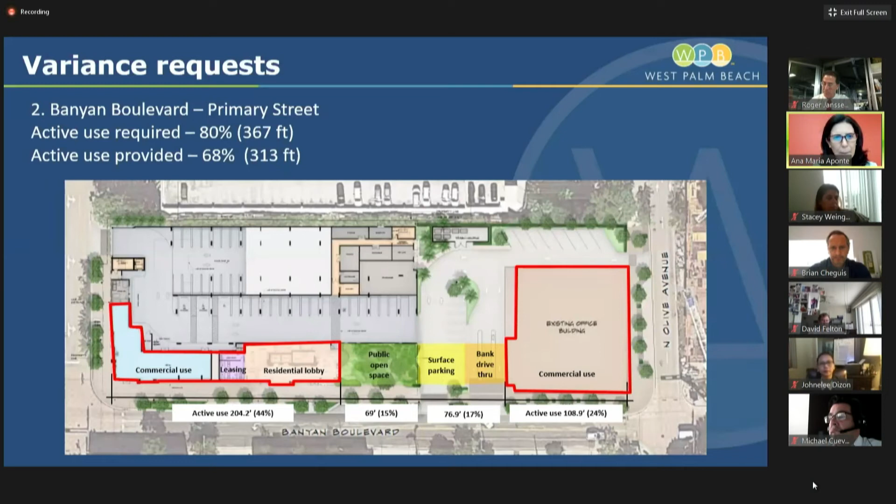That will also translate into the next variance that the applicant is asking for. As I mentioned, the open space cannot be counted as active use because the uses are not provided along the frontage adjacent to the open space.

But regardless of that, the open space provided is a very beautifully designed garden courtyard that provides access to the lobby on the west side and definitely buffers the parking garage. So it is an asset for the project, and we think it's going to be a great amenity for the community.

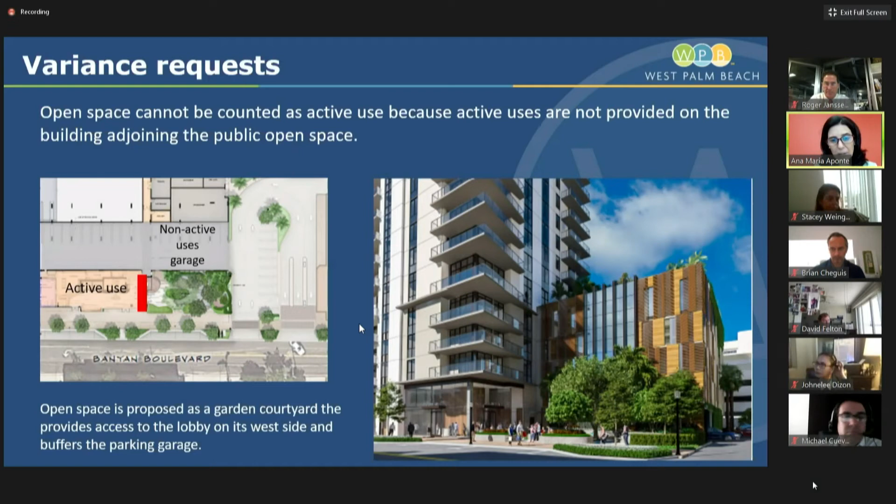If the open space were counted as part of the active use, the active use frontage will have increased from 68% to 83%. So considering this, the fact that the open space is a very well put together design that will be an amenity, staff considers the request is reasonable due to the constraints of the site, due to the inability to provide active uses on the north side of that open space.

But we think the open space will still provide a very pleasant pedestrian environment along the street for anyone walking on the sidewalk, and will definitely create an amenity. So staff considers the request is reasonable due to the constraints of that.

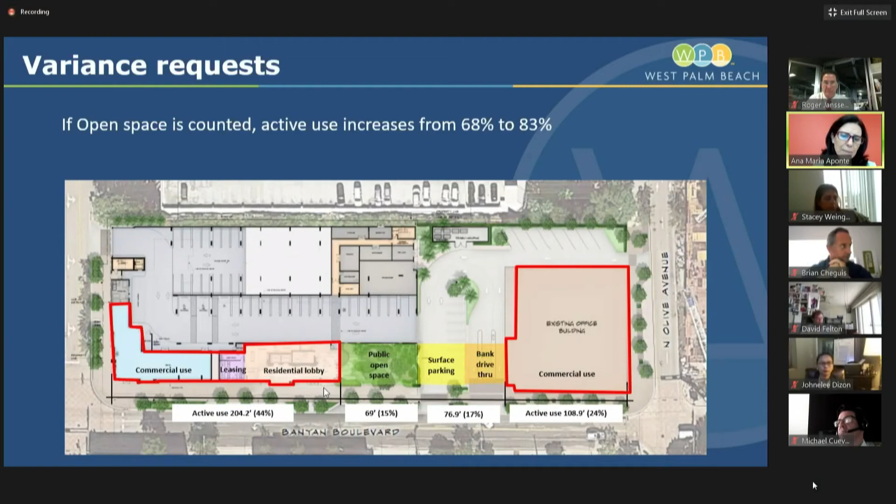And if we go to the next request for variance that the applicant has requested regarding the minimum percentage of active uses along the perimeter of a public open space, if this variance is granted, then some active uses will be provided, and that will mitigate the active use variance. In this case, the code requires that open spaces have a minimum of 25% of its perimeter with active uses. For this project, we have only 17.3% provided, and it's the lobby area that is located on the west side of the open space.

I mentioned the north side of the open space has only the garage, and the east side has the surface parking lot and access to the garage. As it was mentioned already, the narrow configuration of the site makes it difficult to provide an active use along the north side of the public open space.

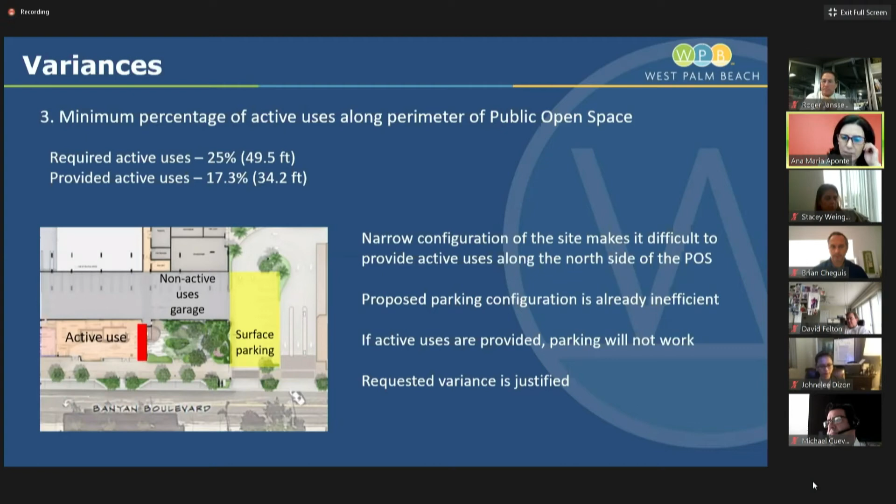The proposed parking is already an inefficient configuration, so if any requirement had to be complied with for active uses along the north side, it would basically make the parking garage totally dysfunctional, so it would not be working. In this sense, the variance request is justified, and staff is supporting this request also.

To mitigate the lack of active uses, the applicant has worked with staff a lot to provide architectural treatments to screen the parking garage. Keith went into a lot of detail to explain how this design was conceived, and staff agrees it's a very good put together design that will provide an interesting screening for the parking garage.

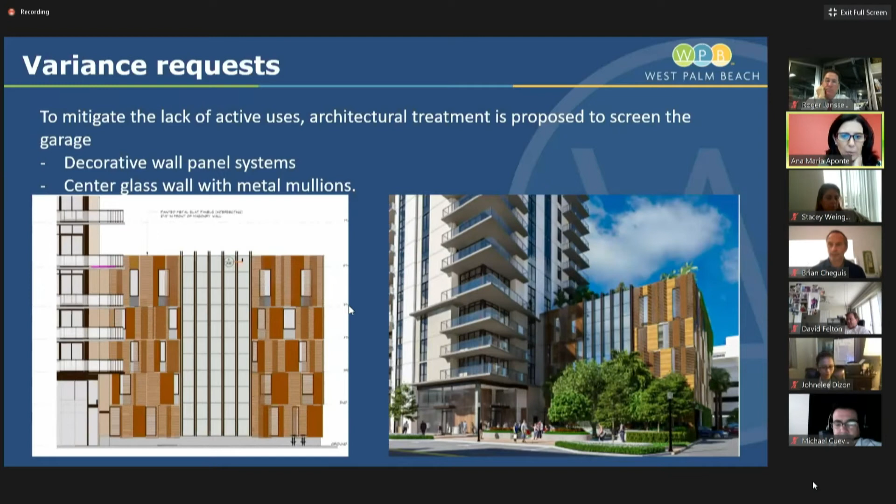We believe this box that is ultimately created works very well with the 4-story existing Wells Fargo building, and creates a sculptural piece in itself as a background to the open space. So staff supports the design of this screening and accepts that it basically highlights the open space and is not detrimental, despite the fact that it does not provide the active use required.

The fourth variance, despite not being related to active uses, also affects the active use requirement. It's from section 94-111(o)(3) regarding the maximum width of curb cuts. As explained by the applicant, the maximum curb cut allowed by the downtown master plan is 25 feet in width. The applicant is proposing to reduce the drive-through to 30.8 feet.

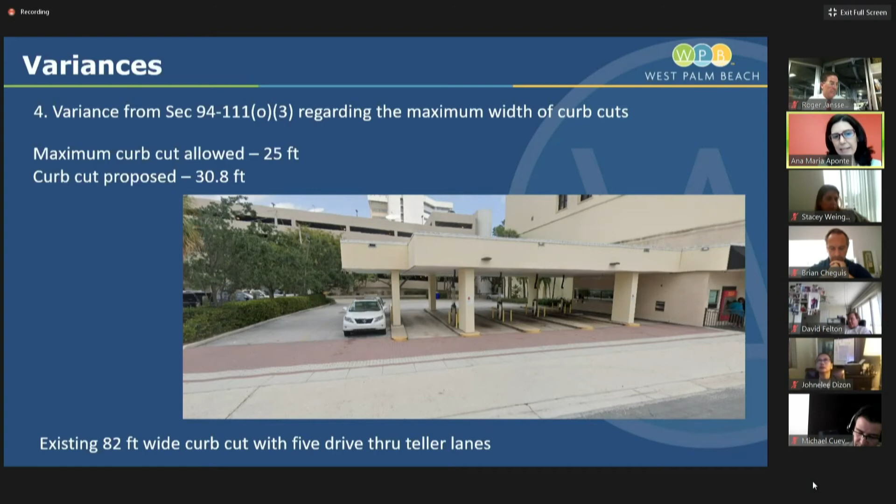The existing one is 82 feet in width, and it has 5 drive-through teller lanes. The applicant is reducing these to 3, which is a big improvement for the area.

In addition to the drive-through, the current configuration also has an additional entrance to the parking lot with a parking aisle. The existing curb cut is 30 feet with a 24 foot wide parking aisle. The project is also proposing to reduce that, which will substantially reduce the vehicular use area for the final project.

So as I mentioned, the drive-throughs will be reduced from 5 to 3, reducing from the current 81 feet to 30.8. The access point will also be reduced from 30 to 24, and the parking aisles will be reduced from 24 feet in width to 18. So if you look at this drawing, it is very telling.

The yellow is the total area dedicated to vehicular use right now. That is around 135 feet in width. It works right now basically as a continuous curb cut as perceived by pedestrians, and the new project is reducing that perception to 72.8 feet, from which 18 are dedicated to the parking aisle.

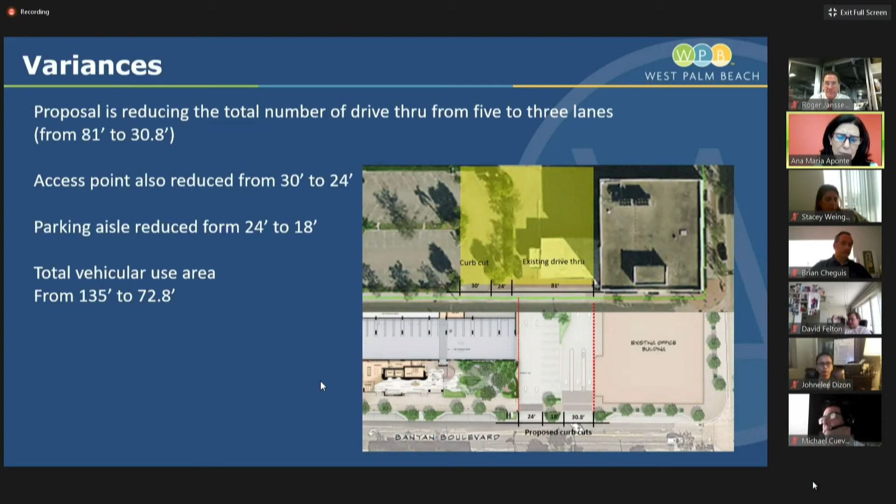There are particular conditions that exist and are not the result of the applicant's actions. The lot depth, as I mentioned, does not allow a parking garage to be built in an efficient manner and provide additional active uses. The location of the proposed service areas is the only option that allows the adequate layout of the building. And the site currently includes 81-foot wide drive-throughs, and the proposal is reducing that existing nonconformity.

The applicant has worked with staff to reduce the request to the minimum necessary to make the project work. The requested variances will not be detrimental to the public welfare and support the redevelopment of the existing surface parking lot, which will be a substantial enhancement of the area.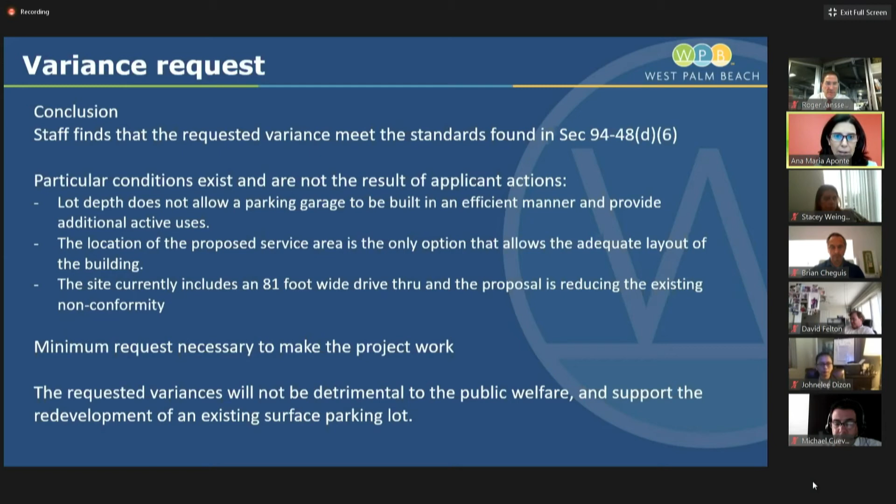Staff has 3 conditions that we're recommending for these variances. The first one is the applicant shall ensure that the execution of the parking garage facade articulation reflects the details indicated in the renderings presented as part of the Downtown Action Committee's submittal, in terms of material, color variations, numbers, or elements provided.

Staff just wants to ensure that as the project progresses and is developed, the details of the facade articulation are not reduced or diminished due to construction or project development plans. We want to ensure that what is presented to the board remains throughout the entire project and is the final product. One thing to mention here, as Keith referred in his presentation, we are presenting these as an architectural treatment for the garage, so it does not include the art in public places.

So the idea is the project is approved as it is presented to the board right now. If in the future the applicant decides to engage the services of an artist and modify the architectural treatment or even the public open space, any modifications to the current proposal will have to come back to the board for separate approval.

So if that happens, you will see the project again with modifications to the public open space and the architectural treatment and the incorporation of art in public places.

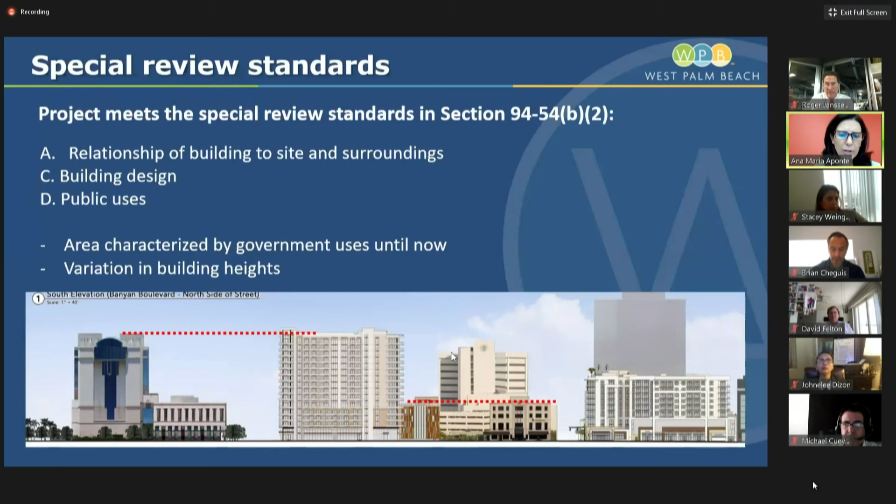The project is also placing the building in a way that highlights the importance of the corner of Banyan and Dixie Highway. It is a focal point, almost the terminated vista for Banyan Boulevard, and the applicant has proposed the tallest portion of the building located at that corner with a feature element that almost makes it a tower. So it's gonna be a landmark for the downtown, very visible, as you can see on the picture. On the left-hand side, the building projects in that area and will be kind of a tower coming out.

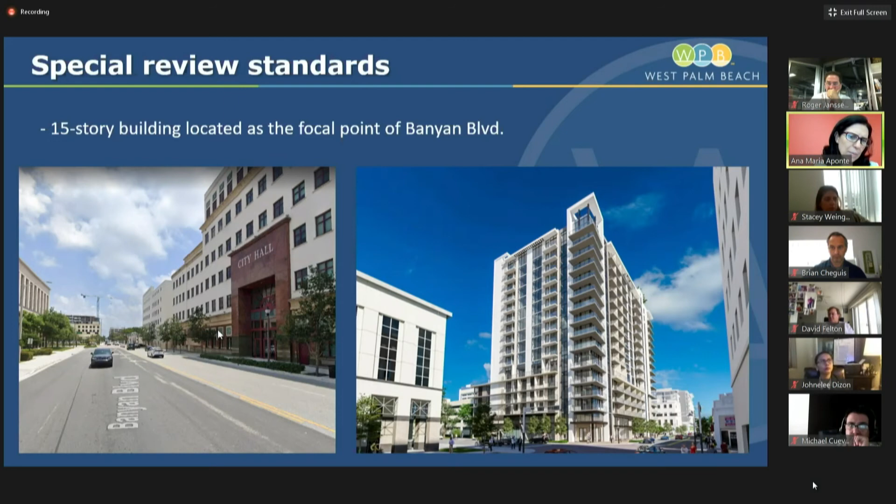The applicant has also proposed the building doing a transition towards the north side on Dixie. The building is set back from the north property line, the tower portion 35 feet. So it has a 5-story component that lines with the existing county parking garage and then steps down to the historic building. The corner building with the 15-story along Banyan Boulevard is the most appropriate location for the tall building, especially considering the south side of Banyan Boulevard is currently zoned for a 12-story building.

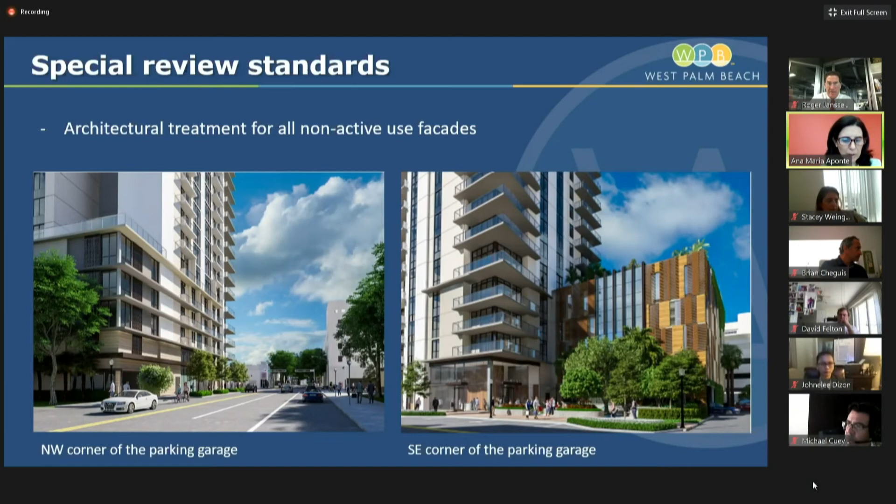The applicant went into a lot of detail explaining what we've been working with them on in terms of the architectural treatment for all the non-active uses. Staff is comfortable that the features provided will effectively screen the non-active uses, not only on the southeast corner of the parking garage next to the public open space, but also the northwest corner of the garage that is highly visible from Dixie Highway. Considering the architectural treatment is linked to the variance request, staff has recommended a condition on the variance to ensure the quality of the screening details are maintained as illustrated in the presentation.

One additional condition staff is recommending is regarding the landscape materials proposed to soften the parking garage. You can see in this picture the renders show landscape material hanging from the pool deck, and there's also a green wall on the lower portion of the garage. The applicant is proposing confederate jasmine and blue sky flower for those two elements. Staff is recommending installation of an appropriate trellis system to support the growth of those vines as shown in the renderings, to be sure the plant material can have the technical support to grow as shown. We think it's a very nice element to add. It's not only the hard elements for architectural treatment, but adding the landscape component will enhance the quality of the screening for this building. This will still be highly visible from the street, so we think it's an appropriate element to add. Staff is also requiring a maintenance plan be prepared, which will be included as part of the site plan approval for the project.

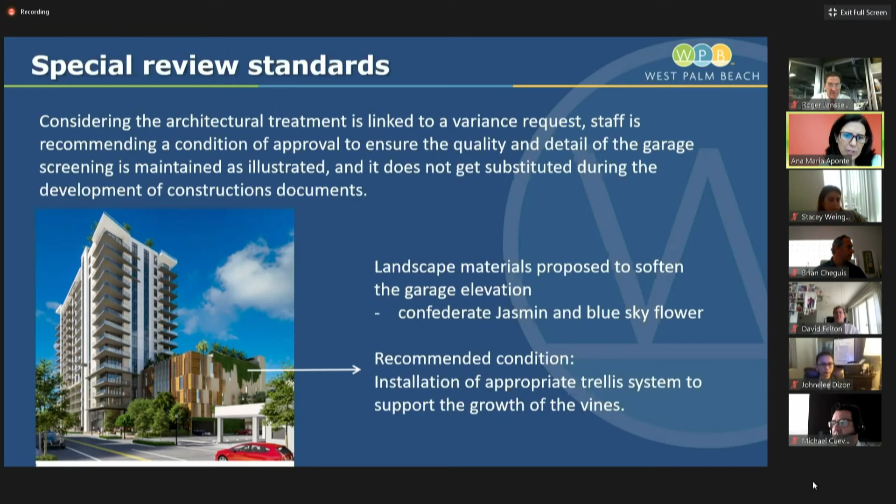In terms of the public open space and streetscape enhancements, we believe the project is a substantial enhancement of the public realm. The current surface parking lot does not provide any activity on the street, so the new building will provide additional activity with the entrance to the lobby and the retail use on the corner of Banyan and Dixie. It's a good enhancement for the quality of the public realm. Staff is recommending that in the design of the public open space, one of the benches proposed for the plaza be turned towards the sidewalk, so at least one has the ability for people to sit facing the public street.

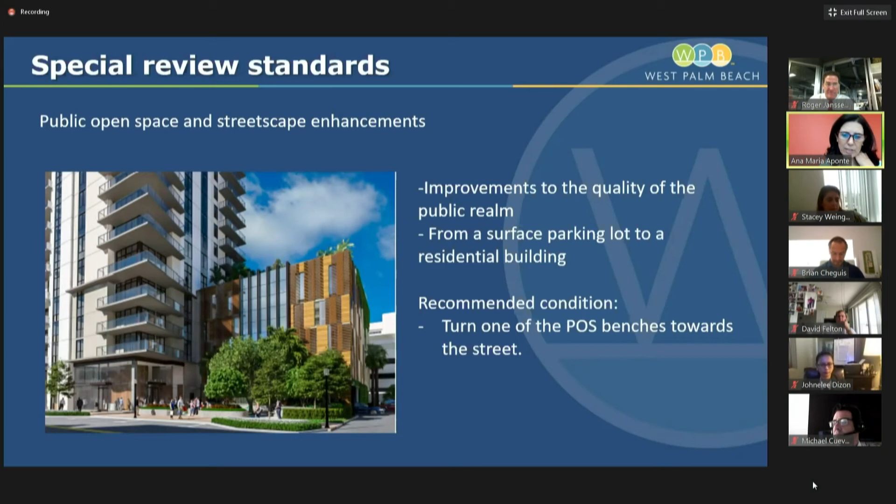In terms of the traffic circulation and traffic flow, we have been working with the applicant and the engineering department on resolving a series of elements for the circulation of the project. The applicant is implementing strategies to mitigate the impact that traffic circulation is going to generate on the public realm. They're reducing the curb cuts as much as possible, as demonstrated by the variance they're requesting on the drive-through, and they are providing streetscape around the entire site with trees and landscape.

The curb cuts are also being proposed with pavers to highlight the crossing for pedestrians, and they will be maintained at the same grade as the sidewalk. Staff is recommending one condition for this: the installation of a pedestrian warning smart sign outside the Dixie Highway driveway to warn pedestrians that a car is coming from inside the parking garage.

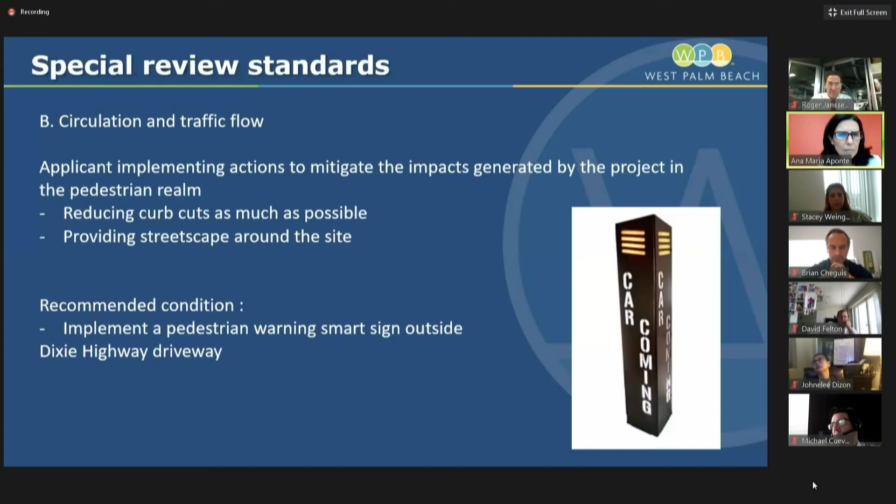Based on this analysis and regarding the special review, staff recommends approval based on the finding that the petition meets the standards as indicated by section 94-54(b)(2), and we're recommending the following conditions.

A, the appropriate trellis system shall be installed on the east-facing garage wall to support the adequate growth of the proposed vine. The applicant shall submit a maintenance plan specifying the area to be covered and how the vine is to be maintained within the area, and the maintenance plan will be part of the site plan approval.

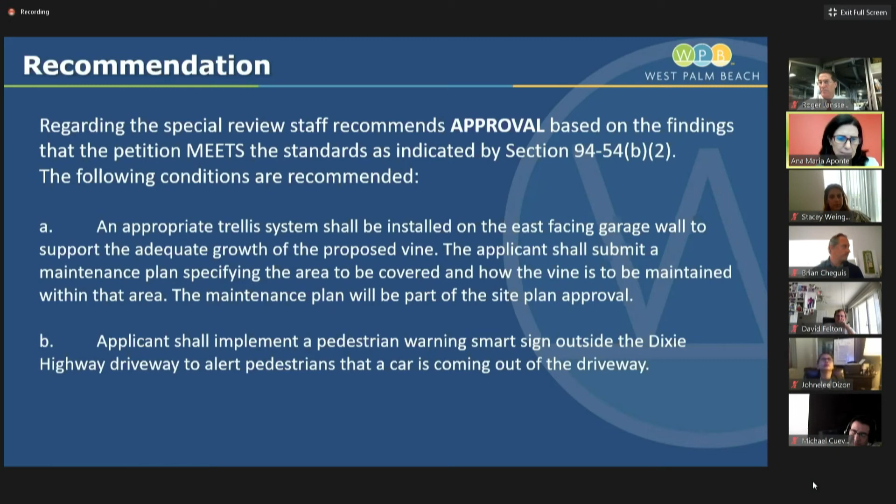B, applicant shall implement a pedestrian warning smart sign outside the Dixie Highway driveway to alert pedestrians that a car is coming out of the driveway. C, at least one of the proposed benches within the public open space shall be oriented towards the sidewalk.

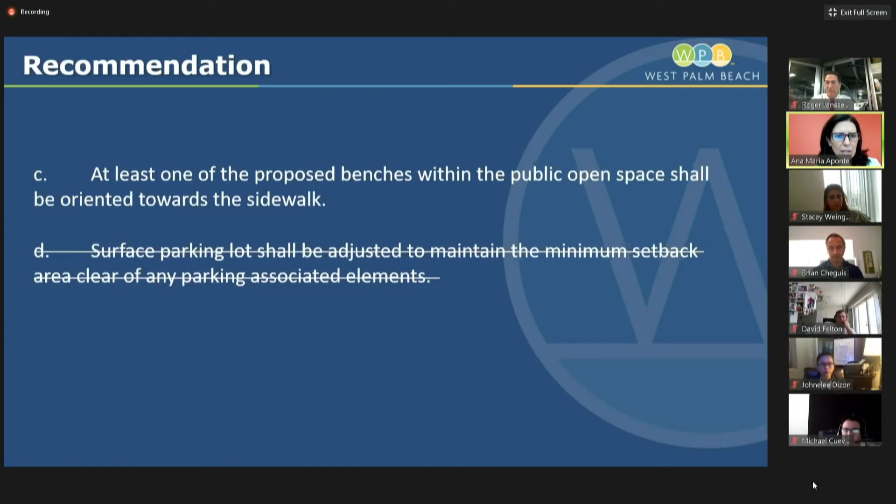D, the surface parking lot shall be adjusted to maintain the minimum setback area clear of any parking associated element. This condition D is being struck by staff, as it has been determined that the surface parking actually meets the setback based on the new curb cut configuration and the new curb line established by the streetscape improvements on Banyan Boulevard. So staff is removing condition D.

Based again on the staff recommendations for the variance, staff is recommending the following conditions. Applicant shall ensure the execution of the parking garage facade articulation reflects the details indicated in the rendering presented as part of the DAC submittal, in terms of material, color variations, number of elements, etc.

The suspended paver system shall be implemented within the public open space to ensure the proposed trees grow to their full potential. The tree root growth area shall be a minimum of 10 feet around the tree trunk. And C, the paver area proposed at the two driveways along Banyan Boulevard shall be extended to the 16 foot setback line.

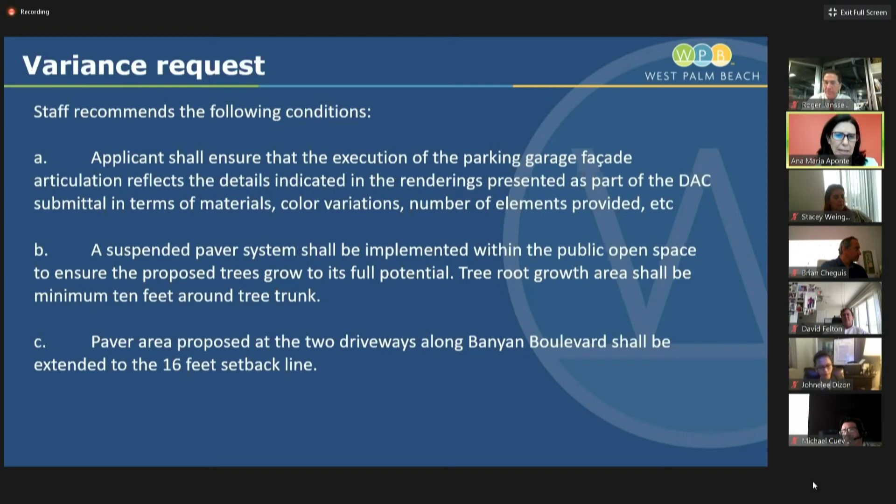That concludes the staff presentation.

Roger, we are not hearing you. You're on mute. There we go, sorry, we're back. You got me? Yes. Yeah, thank you.

Very nice, succinct summary. Appreciate your explanation of the variance requests, and same to Rob and Keith. Nice, thorough presentation of the project. It's very interesting, looks very successful.

I suppose, John Roach, should we go see if we have any public commentary before we have our questions from the board? Mr. Chair, according to my records, there has been no public comment or anybody wishing to speak, so you should be able to continue on. Okay, seeing none, we'll close the public discussion.

We'll open it up for the board to ask questions of either the staff or the applicant, and whatever the protocol is, we would take those questions now. Mr. Chair, please be aware that Mr. Gregory Gabriel has entered the meeting. He's probably been on for almost an hour now. Oh okay, great, thank you for the clarification.

Mr. Chair, I have a question for staff. Yeah, oh please, go ahead.

Okay, yes, Ana Maria, I have a quick question regarding the site plan and the site data for the parking. Can you walk me through the parking calculations in terms of the project being viewed as the whole site, including the Wells Fargo Bank building? When you look at the parking calculations, it's showing the parking for the existing office building, which I'm assuming is the 44,000 square foot bank, as 7 parking spaces. I'm trying to understand how the calculations work, and whether there is going to be enough parking globally for the site. The site plan shows a future subdivision line, and it looks like the 9 compact spaces, the 8 spaces, and 1 handicap space are going to end up on the bank side.

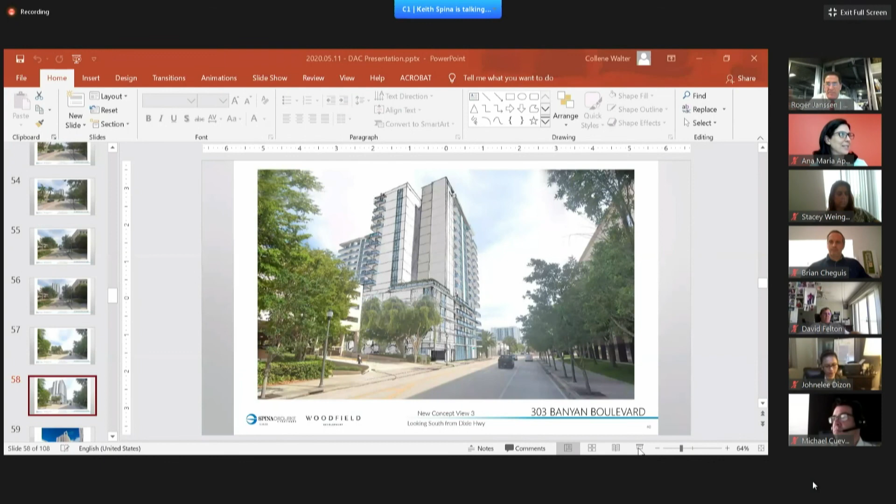So I think what Michael was touching on was exactly that - what do you do with a 10-story elevator shaft or trash enclosure other than painted stucco? I think that certainly could use some restudy, especially seeing that you did identify it as a major component, as a visual anchor to the building driving in south on Dixie. And I understand the attempt with the horizontal lines at the base of the building, the cantilevered balconies. Again, in general, I just think there could be a little additional study done on some of these massive vertical components of the building.

But go ahead and continue around to that next slide, I think you had the views over on - yeah. And then I think Mr. Spina mentioned also that the nature of trying to create an iconic component to this building to have a memory point, as it were. So I think what you guys have done on these corner components with the skewed balconies, the vertical extension of that corner element is very successful. Again, it's that extrusion and the run-on of all the floor plates going top to bottom that always seem to be the challenge with these structures.

So they don't wind up being repetitive masses of stucco and glass. But I think this is a real good start, similar to what you did at the Overseas building with the eyebrows as the cap of the building and some different articulation at the base of the building. Again, it's hard to tell exactly a lot of the details on the ground level on the west and the south side.

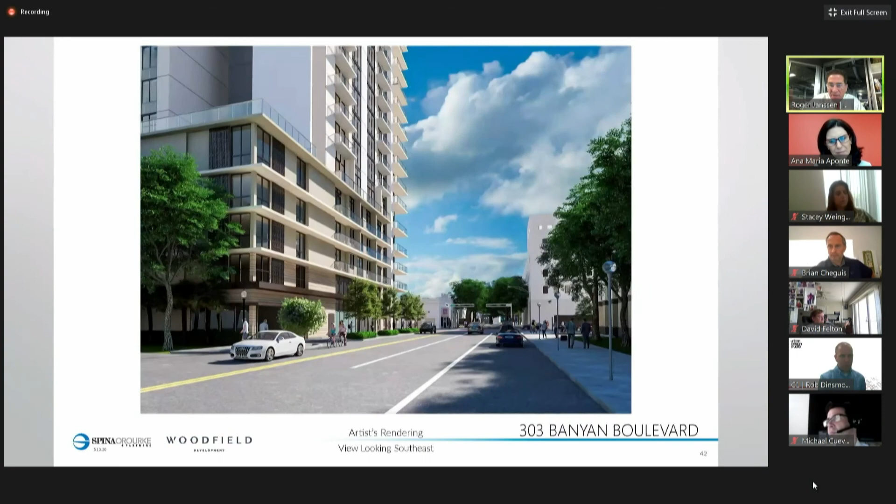If you continue around to that, your southeast corner - I think probably the most successful component of the building is this area at the garage structure and what you've done with that facade, and the amount of energy you placed into that component of the building is very successful. It does seem quite a bit of an anomaly to the rest of the project, and maybe that's intentional.

And I don't know if it's worth studying how that tectonic and material and color palette could be integrated into, I think what was described as the base of the building, the first five stories, to integrate the two structures, or again, if that was the intent, to have these completely separate components and read that way.

I think that park - what you guys did with the integration of the park and the public open space and the integration to the foyer - is really extremely well done. And hopefully those shade trees don't end up growing and getting so large that it obscures such a nice part of the architecture, but I guess that will happen in time.

Yeah, for the most part, I think you guys did a really nice job. Again, maybe a little bit of study in some of those particular areas, but yeah, it's nice work. I don't have any further comments. No problems at all with any of the variance requests. I think you guys did a great job working diligently with staff to vet all those out, so I don't have any questions or any issues with that.

And I think - Mr. Chair, motion to approve.